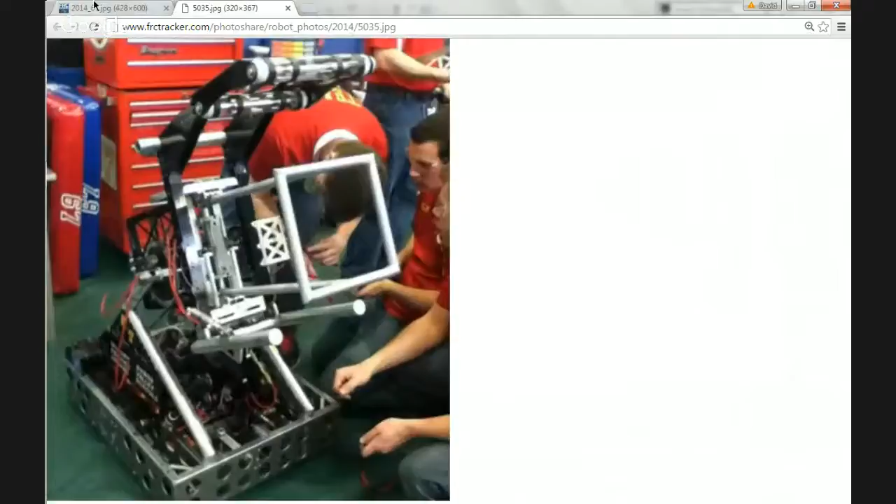These are the two photos that we're going to be using to redesign or design from scratch the FRC-67 robot from 2014, Hotbot. Hot always has really, really nice designs. We're going to, in one sitting, do our best to get as much of the design out of the way as possible, figuring out all the constraints and the general sizes of things, and then getting started on a 3D model.

So this robot functions by having this one large arm. It picks the ball up by tilting down in this direction, scoops it up with the intake rollers against this bottom bar here, and then the entire arm will rotate around, and there's a very mean looking puncher back here, powered by constant force springs, the same springs that are inside your tape measure. That releases all of a sudden, punching the ball and firing it out.

Very, very powerful. Was a very successful robot. It was great looking too. Another cool feature is to center the ball. It had these, see the flames here, that's actually a four-bar linkage that'll come over here and slap the ball on either side to center the ball on the puncher.

You can see here, this is the puncher when it's deployed. Springs are released. It's this large square here that'll hit the ball on all these sides, and it'll fire it. Fantastic looking robot. Worked very well. Great on the field. So let's go ahead and get started designing it.

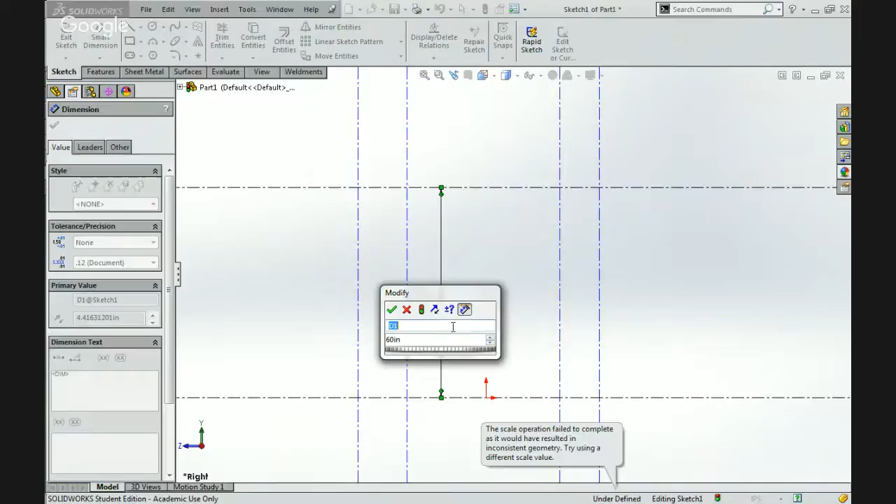Changing this value would result in invalid geometry. Previous state has been restored. I'm going to give this a shot going right to the origin. I have no idea why this is happening. Goodness gracious. Try 60 one more time. Not going too well. So here's the next plan. Let's get rid of that horizontal relation so that way that line can pivot. Maybe that's what's causing the issue.

60 inches. Dang. It's obnoxious. Maybe there's something up with that line that I drew. SolidWorks is having some sort of issue. So draw a fresh line. Call that 60 inches. Valid. All right, we're going to start over. Oh goodness, SolidWorks, sometimes you drive me nuts.

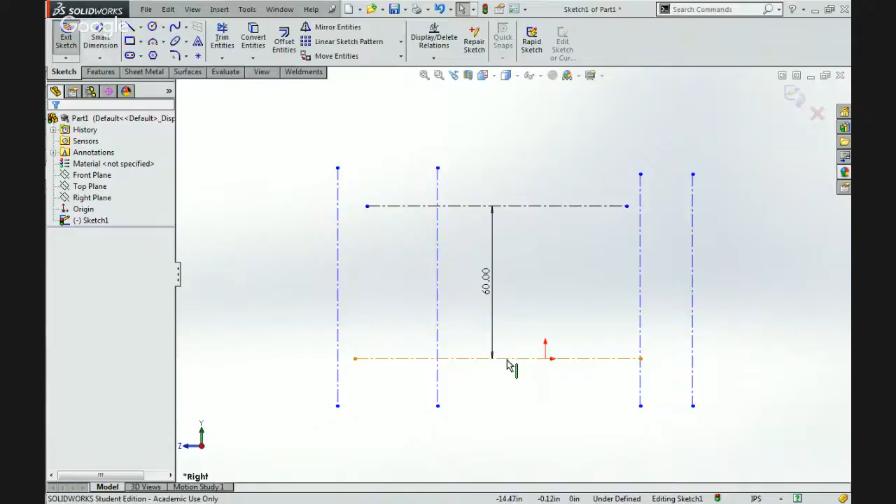So pretend this is our upper limit. Double clicking, by the way, lets you exit the line that you're drawing while still keeping in the line tool. Before you draw the next one, you just double click and it'll not add the one that you're about to draw. Great, now let's try. Come on. Inches. There we go, that worked. So that's 60 inches now. Just because I like infinite lines, I'm going to make all these infinite length. Hopefully it won't give us any grief about that.

Now this is going to be representing the width of the robot, but the protrusion is at a set number, and I don't remember what that number is, so let's go figure that out. You're going to find that number in the game manual. So for instance, this is going to be Game Manual FRC 2014. And look at that, FIRST has great documentation.

Let's see here. Is this really 2014? Sure is. But you have to go to the archive. That was the old website they had set up. So here we go. This is it. Admin manual, one-page game description, game animation. I must have clicked incorrectly. Trying one more time. Those were the admin manuals.

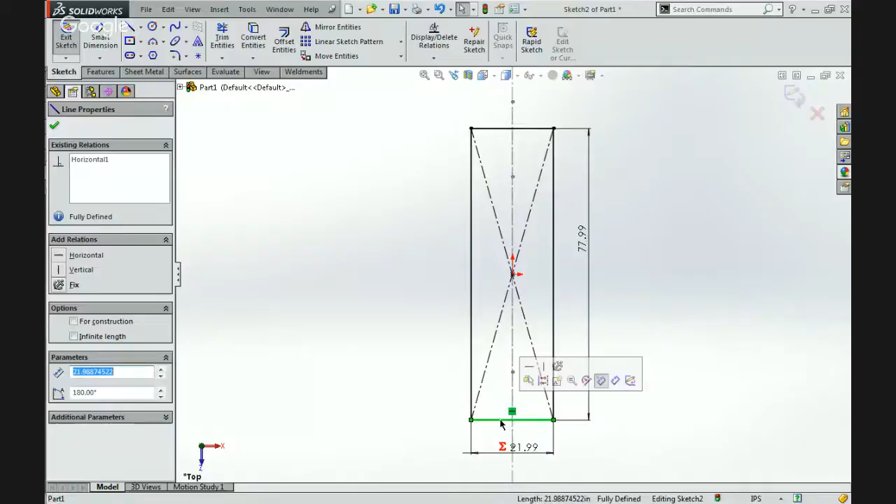Well, that's odd. Because if we take, let's say this is 30 and 26, the sum of the parts going all the way around is 112. Oh, it's very odd. I don't know what had happened there. Must have been some crazy thing I've done. Scratch that last.

Well, we set that equation up correctly. So the equation truly is the other dimension minus 112 divided by 2, or whatever your frame perimeter is going to be divided by 2. That will solve this equation here. So if our robot was 30 inches, it would have to be 26 inches. But in FRC, we need to make sure that we play correctly by the rules. Technically, as long as your design is initially spec'd at 112, they can't nail you down on the rules, but it's always good not to run up against that line.

So if you just subtract 1, if you just do a design frame perimeter of 111, that would be ideal. So just do a frame perimeter of 111, divide by 2. Just to make your life easier once you get to competition and you're being inspected, just to make sure that you don't accidentally go over your frame perimeter. So in this case, it would be 30 by 25.5. Perfectly awesome. So we now have 2 dimensions of our robot laid out.

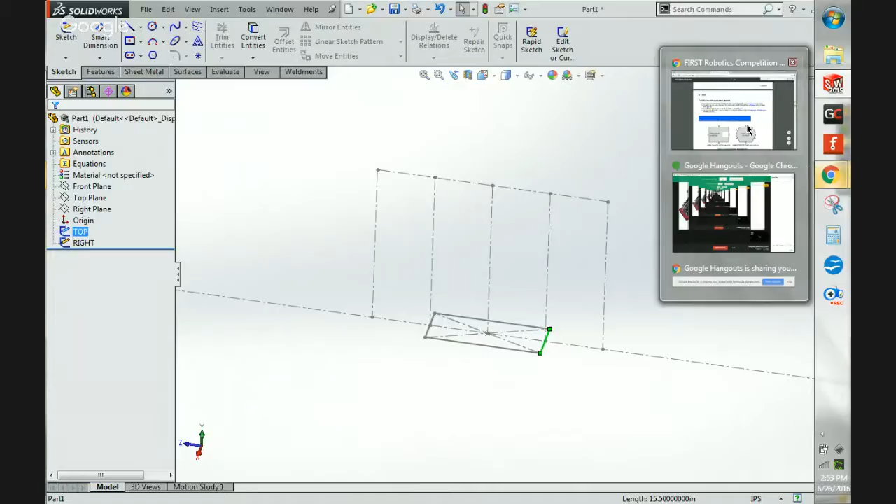So if we go back to our top view and we say, just joking, this is going to be 40, you'll see that this sketch updates. It's still coincident with that pierce. So the only data that we really have any idea about is just the aspect ratio of this robot. So who knows how big this robot actually is.

If we look at it with the 24-inch ball, it might be 24 inches in diameter or a little bit bigger than 24 inches in diameter. That's the size of the ball. So what if it was 26 inches wide? So let's jump in. Let's make this 26 inches wide. Actually, it wants to be the other direction.

So we can see here that it's supposed to be 29.5 inches long. So I'm just going to do 29.5. Gets it in the right orientation. That way, this is the width. We're looking at the side profile of the robot, which is going to be longer. Great. So does that look about right for aspect ratio? I think it might be a little bit boxy. So if we can make this a little bit longer, maybe it's supposed to be, I don't know, 30.5.

Maybe 31.5. Maybe it's exactly 24 inches. We can see here that's about the right aspect ratio. So that's about the ratio that they had. It was probably 24 inches frame perimeter wise.

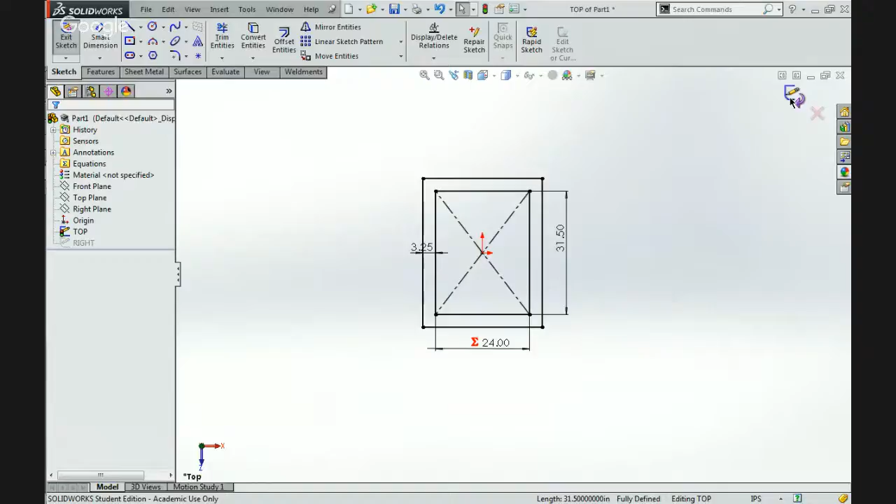There is another variable that we kind of forgot about, which is the bumper. So if we go into our top-down sketch, this is the frame perimeter. That's what this represents. But there's also the bumper perimeter. If we take our offset entities tool, bumpers are 2.5 inches, but the back plate for the bumper, the 3/4 inch plywood, that's 3/4 of an inch. So we can add those two numbers together. What do you know? That is our bumper perimeter. Very good. So that gives us a sense, again, of where it is.

Just a note, though, this dimension here is exactly to the frame perimeter. When we looked up that rule, it had to be 20 inches from the frame perimeter. It doesn't matter where your bumpers are. In this case, the bumpers are going all the way around. If we wanted to, we could have the bumpers split, but as you can see here, bumpers go all the way around. In fact, they made their bumper one piece, and it went on just like a sock.

But when I saw them at competition, I was kind of fearing for the robot. They were whacking this bumper down with hammers, and they had to whack on the red bumpers and whack off the blue bumpers and everything. It was quite horrific to see that sight on such a nice, elegant robot. Their bumper system didn't work too well. So I would recommend splitting up your bumpers into 4 pieces.

For instance, if you look at your robot here, you might extend this entity over here and that entity over there. Break up your bumpers into multiple segments. So that way you have one bumper here that's longer, a narrower bumper, a long bumper, and a narrower bumper. You could split it up in the other direction too. That's up to you, whatever fits the design more. Great.

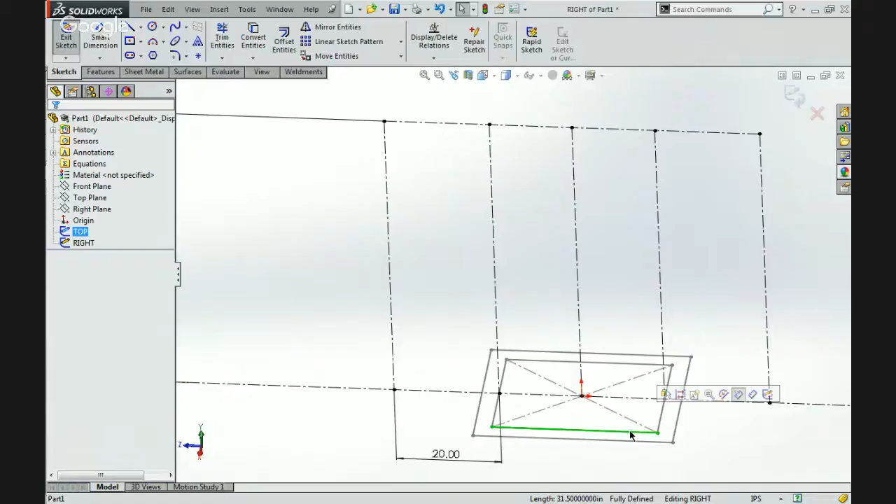You might not know that it's going to be 31.5 inches in the end, so you might start with 30 inches and then realize, oh, I can't package everything that I want to, so you'd make it a little bit longer, and hopefully your robot won't explode. So it's a lot of a give and take, but for the simplicity of this example, we're just going to say that this is about right. We might have to go back and change that number later on.

So here's our bounding box. We have our robot that at the beginning of the match has to fit inside this area here. But what does it have to play with? Well, it has to play with spheres that are 24 inches in diameter. That's a little bit big considering how big a robot can be. Yeah, that's a little bit scary.

It's going to be a challenge to get our robot to handle these large spheres, but we know that it can be done. We can see here this is a successful example. And what they did was they had this arm. So let's get started on designing the arm. But before we can design the arm, we need to know, well, what does the drivetrain look like? So we're going to design our drivetrain.

Here we go. This is the side view of our drivetrain. We can see here that the design they chose to go with was a sheet metal drivetrain. Those are very nice, robust, light. However, on Rat-Pak, we've had trouble with them. We just spend so much time on the drivetrain, we end up losing our train of thought for later on getting the top hat done correctly.

So I would recommend on Rat-Pak, until we master the drivetrain and really figure out exactly what we want to be able to do, use the VEX West Coast drive. And West Coast products are fantastic. They are all part of a system and they all fit together masterfully well.

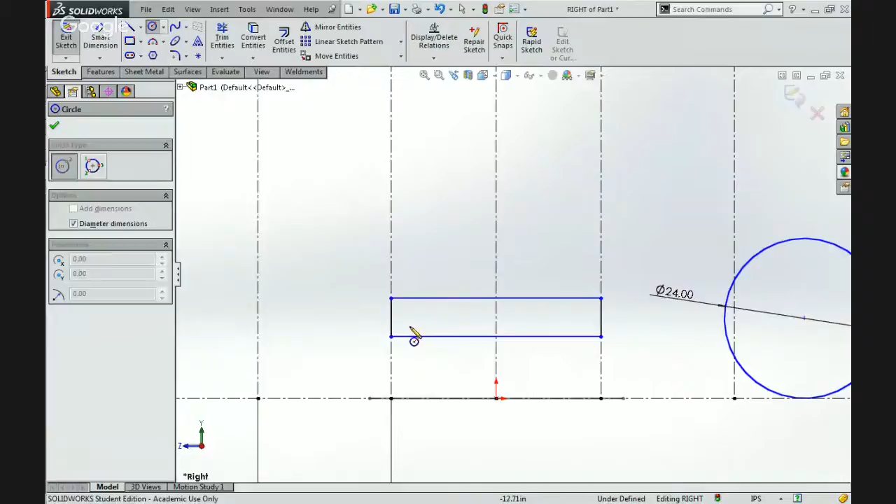It's very important when you're dealing with these tank drives that you set an offset between these wheels. I want to make sure that there's at least a 1/4 inch difference, that the center ones are lower or the outside ones are higher.

We also need to make sure that there is space between the wheel edge and the edge of the frame. So let's go ahead and just set that arbitrarily at 1 inch. We'll change that later, I'm sure. To reference the side of the wheel here, I just added a point. And when you add a point, you can see here that it gets these diamonds in the corners. When you hover on top of them, you can place points at those places, and then you can reference those points. So that's all happy, fun, and games.

Then we need to mirror this over to the other side, and we'll see how to do that here with just the mirror tool. Entities to mirror. We're just going to keep mirroring this over to the other side here. Look at that. Very nice. There's one more thing that I want to do is figure out the spacing of this wheel. You can see here that we don't really know where it is left and right. Don't worry about up and down just yet. We'll get to up and down.

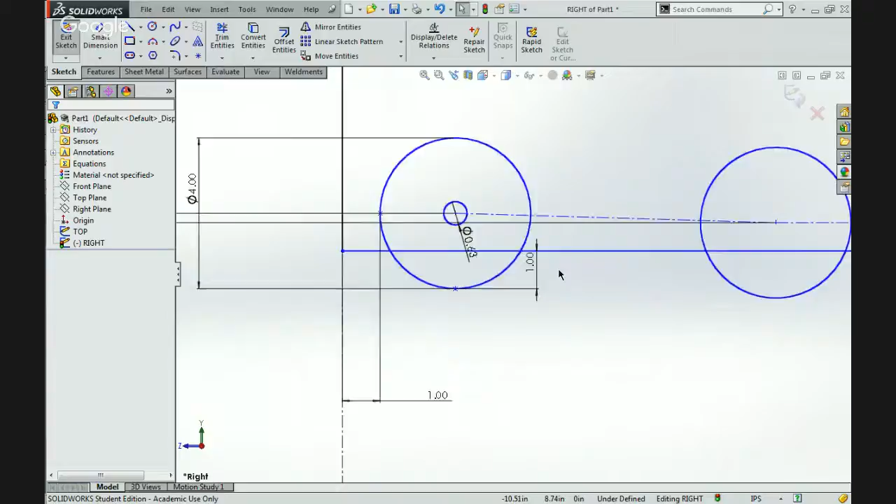But we're likely just going to use actually 5/8 shaft, 0.625 shaft. So as long as there's this much room here on the plate, you'll be just fine. And the more critical thing is this one over here. That one's closer to the bottom. So we got to make sure that that 5/8 circle isn't running off the edge. And clearly it's not. We're completely fine.

But if you had thought that this would be great as 1 5/8, look at how close this one gets, right? Your bearing or your wheel shaft is going to be really close to the edge. You got to make sure that, especially when it gets a little bit lower, that your shaft isn't overhanging on the edge there. So that's just something to consider. Make sure that you don't make that mistake. But hey, look at that. Now our robot has wheels. And just to make it pretty, let's just mirror this over to the other side.

Having detail in these drawings is very important. It can remind you of things in the three-dimensional world. But clearly our wheels are going to be on the ground. So go ahead and make those tangent. And they should be fully defined right about now. If you haven't fully defined them, figure out how they move and then constrain those. Great. But how tall is our drivetrain?

Well, that would be very nice if we could just make this super duper skinny like that. You very well could. You just have to make sure that you can mount the bumpers. So let's worry about the bumpers right now. The bumpers are a very important part. Before we even start looking at the arm movement, we need to make sure that we understand where the bumpers are, because the bumpers are going to be the thing that are actually interfacing with the ball first, very likely. We're going to need to make sure that we design around the bumpers.

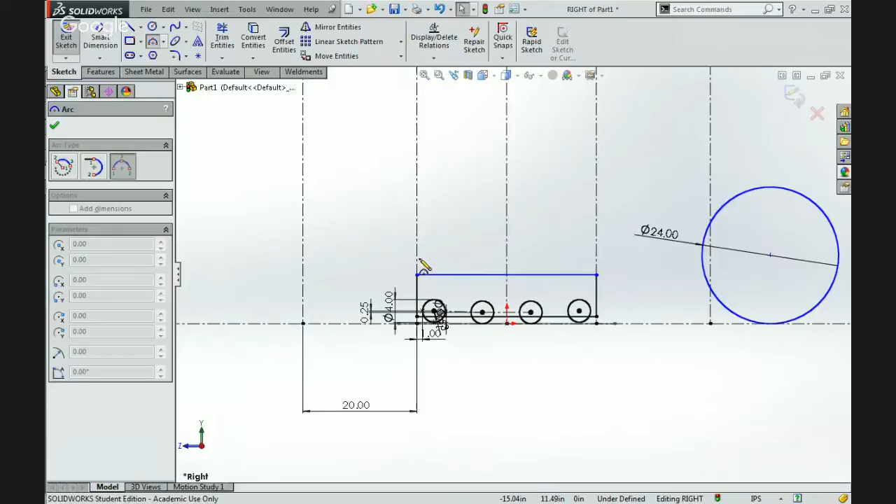So to do that, I'm just going to add an arc. Actually, just joking. I'm going to add a line. This is representing the thickness of the plywood, and that is 3/4 of an inch thick. And then I'm going to add an arc and another line, and an arc and another line. Look at that. That's a bumper from the side profile view. That's all we really need to make this work. So we'll make each one of these segments tangent to the next because it's going to be a very smooth wrapping action.

When the... one second, let me finish that up. Good. There is a plane here. That 3/4 inch is completely and totally wrong. Just joking. It's going to look more like this. There is a 3/4 inch plane. That represents the plywood. That's where the plywood is. So go ahead and make that 3/4 inch.

The pool noodles are complete circles, and so they're going to be tangent with the back plane. So you can imagine here, I added that tangent relation. They can no longer move out as soon as I make these equal to each other. And I set their diameter as being 2.5 because that's the diameter of a pool noodle. There we go. Now they can no longer move out.

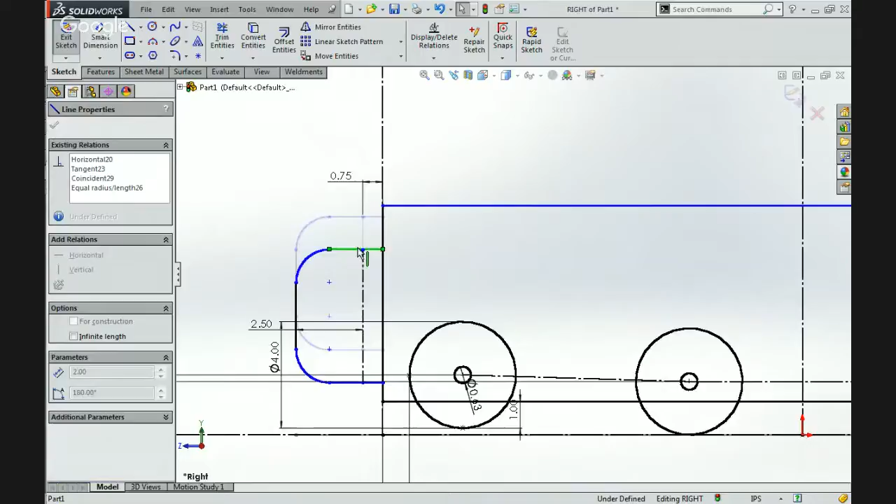There is a rule that defines that. We need to make sure that we research that very well. So if we come over here and we search bumper, there are lots and lots. Bumper zone, that's what we're really looking at. So let's look at the bumper zone. There are only 6 mentions of bumper zones. Great. So bumpers must be located entirely within the bumper zone, which is between 2 and 10 inches from the floor. The reference to the robot floor, yeah, so just if the robot's on the floor, it has to be between 2 and 10 inches.

So this is also what the bumper looks like from the side profile view. You've got each one of the pool noodles. They're tangent to each other, tangent to the backboard. And then you've got your cloth hanging over. That cloth is kind of negligible. Doesn't really affect too much.

But if you have hard parts that might protrude, you know, like this 1/8 inch plate here, you might want to add that in because that adds a total of 1/4 inch to your entire robot width, which can be significant. So make sure you add that in too, if that's the design that you're going to use. But 2 and 10 inches off the floor, that's the important number that we get from here. So let's jump over to SolidWorks.

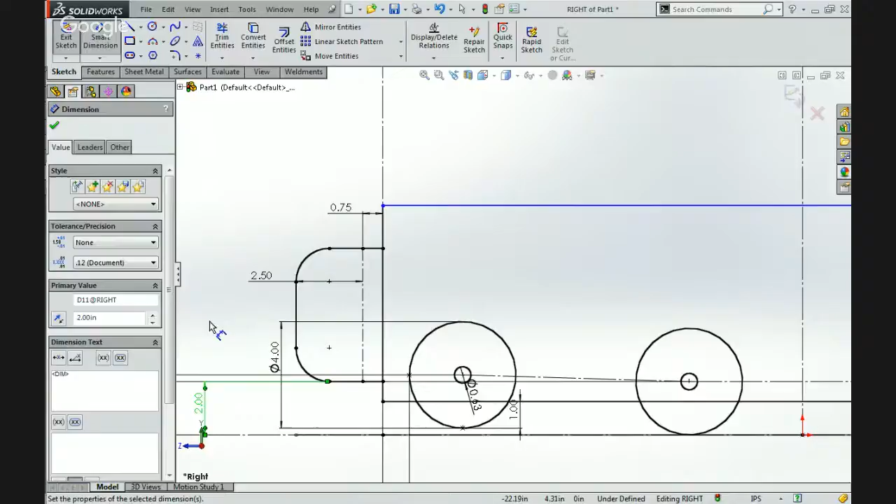So that means that the upper bound, we could place our robot bumpers 10 inches from the floor. They could be this tall, or they could be as low as here to there, 2 inches off the floor from the bottom. So for right now, let's just leave that at 2 inches. Hot likes to put everything as low as possible and keep their CG low, especially when they have such a tall robot. And when we look at their robot here, see their bumpers are essentially flush to the top of their drivetrain. Protrude a little bit, but in our case, let's just make them flush.

So now that our robot bumper height is defined, let's just take our height of our frame and make it match whatever the bumper is. Fantastic. The next thing that you probably get into for designing the drivetrain is figuring out the gearbox, and if the gearbox doesn't fit inside this height, currently this height is 5 3/4 inches. It should fit, but in the case that you can't package it, you're going to need to make that frame taller. But those are all things that you can give and take. So there's an abstract drivetrain. It's looking pretty good. Very nice, very nice.

Now we've got this ball. There's the ball. Pretend our robot is driving up to it. It touches the ball right there with the bumper, and that's all happy. But how does this robot actually function? It's going to need to take the ball from the ground and store it up here, and then have something that fires it, pushes it out. So let's go ahead and get started on drawing whatever that is going to be, and that's going to be an arm.

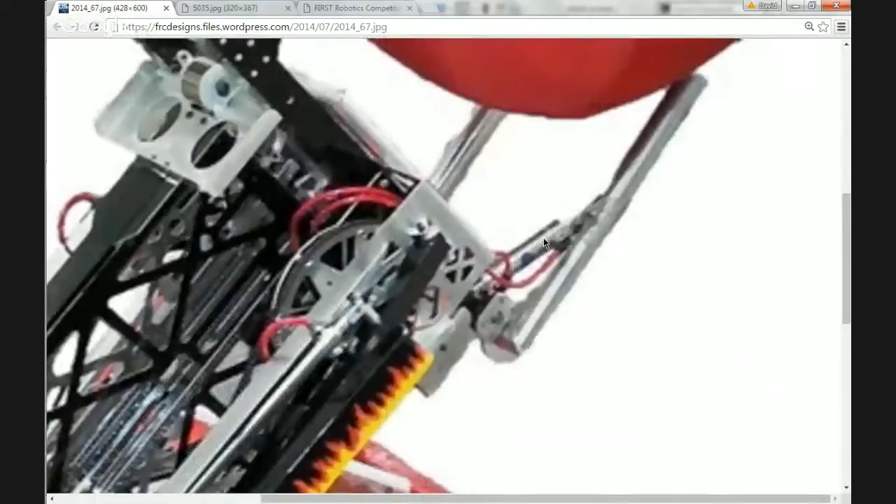They integrated all of that functionality into one system. That's putting all of their eggs in one basket. They have quite a cool bit of detail here. We can see that these two bottom pegs each have their own pneumatic cylinder. Who knows what that's used for? We'll probably figure that out later on. I'm guessing that this is used for tilting these prongs down, so that way they can scoop the ball up more, but we'll take a look at the geometry and figure out if that's needed.

And then they have pneumatic actuated 4-bar linkages that center it. And they've got this intake. So we can see how that all plays in together. And then they've got a pivot point that's back here, and a puncher, of course. So let's get the structure going for wherever our pivot point's going to be. Pretend that this point right there is our pivot point. We need to support that pivot point. It's going to need some structure, it's going to need an axle, really, something to pivot on.

You can see here that, let's see, is this better? Yeah, this is much better. We can see here that there is this structural brace that comes back here, and the actual pivot point is up here. This is a sprocket that controls the angle of the entire machine. So back to our SolidWorks CAD model. Instead of having a point here, let's make the pivot point a sprocket. To get the best gear down ratio, this is going to want to be a pretty big sprocket. So let's say we found an 8-inch sprocket. So there's our sprocket. This is signifying our pivot point.

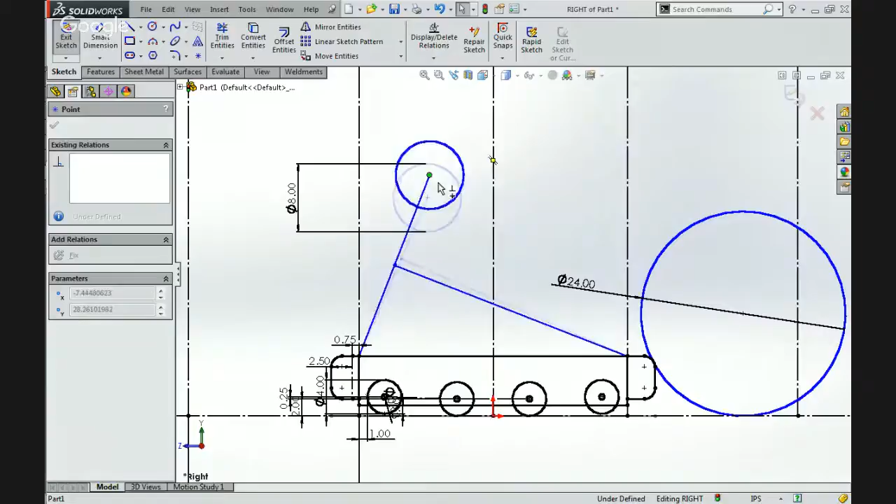So there's that. We don't know where this pivot point is going to be located. We could lock it arbitrarily into space for now, but let's keep building off of this undefined geometry. We're going to need a puncher. That's going to be a really critical point. And we're also going to need an intake roller and this scoop down here. So let's take a look at the scoop.

If we were to scoop the ball directly, as if we slipped a spatula underneath it, we would need to grab the ball with an intake roller that's up here somewhere. The intake roller is going to be tangent to our ball here. And then that scoop would have to go on the ground. Let's pretend this line here is the scoop. It would need to ride on the ground in order to get underneath the ball, or give the roller something to pinch the ball against.

What Hot did was kind of interesting. Instead of holding the bottom of the ball, they're holding the edges of the ball. They have two of these pinch bars. They're not holding the ball from underneath. The ball is actually drooping underneath these two bars.

So we're going to mimic that, but we need to know where on this circle our ball needs to be pinched. This is always difficult to explain, but the ball is going to be drooping underneath these two pinch bars, which means that when you're looking at it from the side, you're not going to be picking it up straight from the bottom. You're going to be picking it up somewhere closer to the center. But how close to the center is that? To answer that question, let's make another ball over here. This isn't going to be part of the robot, just a model over here in space.

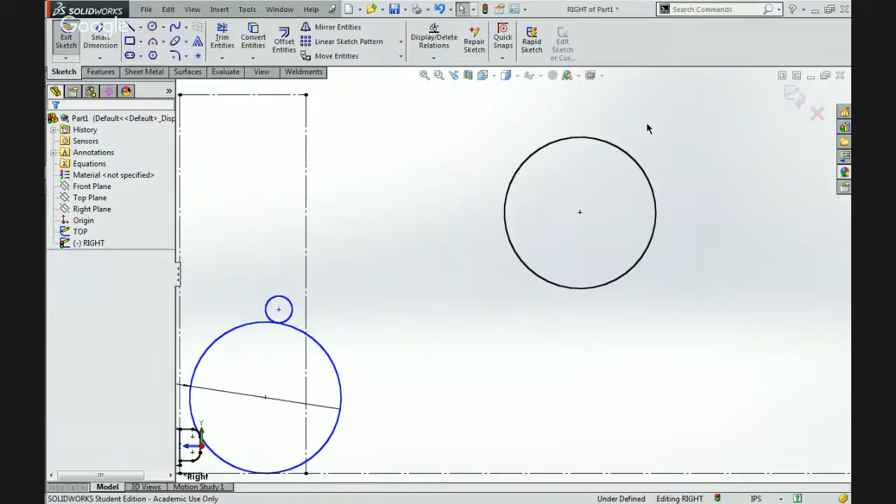Pretend that this ball, we're looking at it from the top. This ball's from the side, this ball's from the top. We have a couple of bars that are coming across it. These are the bars that are holding the ball. This is what the ball is essentially rolling on. Those two bars are equal to each other. That way, when you move them across, they are equally centered. The lengths are equal, which means that they're spaced equally on the center.

Now this is kind of cool. The length of this line, we don't want this to be driven here, you'll see in a second. I'm going to make this a driven dimension. And let's say that the two prongs holding the 24-inch diameter ball are 18 inches apart. So this is where the prongs were located. That means the interference between the prong and the ball is going to be 15.87 inches.

We could imagine that as being the prong length, but this is also the cross-sectional diameter of the ball. If you thought about this as the ball from the top-down view, and you took a knife and sliced the ball perfectly right there, and you looked at this line from the side view, that would be a circle, right? This line is the diameter of that circle. So you could essentially draw a side view of this same exact ball that had a point vertical from that point, as long as their center points were on top of each other.

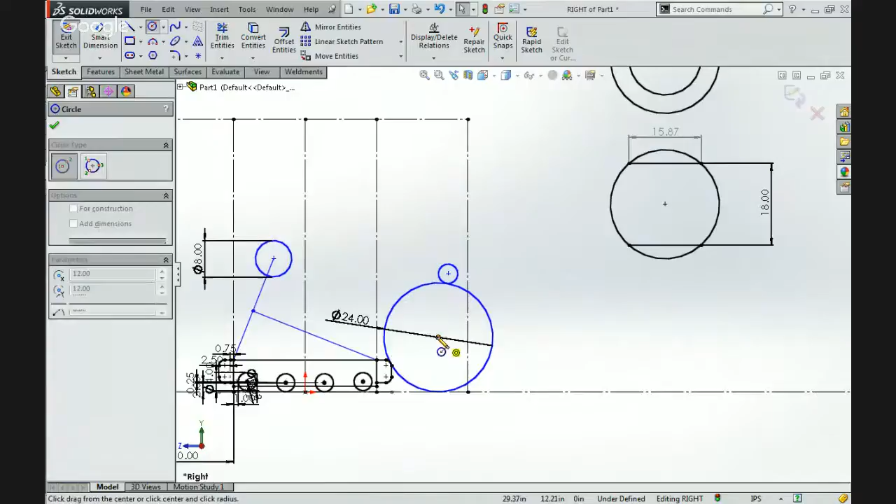Now say that our prongs were 9 inches apart, you can see that intersection changes rather significantly. But if it's back at 18, we can see that's what we're going to be interacting with. So let's say that these prongs are indeed 18 inches apart. Who knows if that's exactly what they used, but we can change that number later on. Whatever that number ends up being, that's going to be very important. So let's make these two circles equal.

Now, the cool thing about what we've just done here is we're making our model parametric, which means that every single dimension that we are specifying is coming from one place of logic. This diameter of this circle comes from the space between these two lines, the space between the prongs. So if we wanted to change those prongs, it's going to change the model. And as we add more relations, the entire model is going to change to fulfill whatever this number is. That gets to be like automating our model, and it gets to be super awesome and cool.

Very good. So let's pretend we were going to make our ball hit our bumper. When the ball hits our bumper, and it's tangent right there, our roller is going to be in contact with the ball. Remember, the roller can never cross this line. This is the outer. This is as far as all of our hardware can go. The ball can cross the line, but the hardware cannot cross this line.

We need to specify some compression bars. I'm going to call these compression bars. These bars here that we've just defined, these guys, those are going to be called compression bars because they're compressing the ball against the roller. So we're going to draw a couple compression bars. There's one, and this is what the ball is going to roll onto.

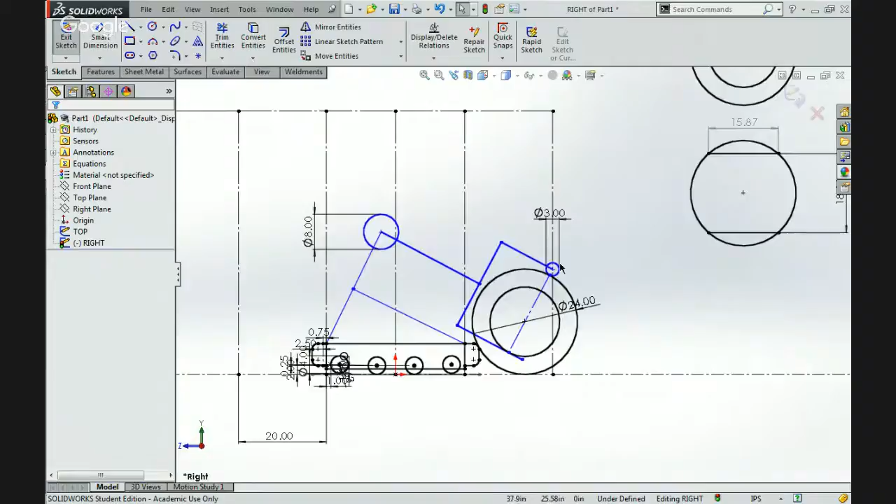I think the reason for that is it shouldn't be defined all the way, except I added this accidental relation of defining the center point of the roller to the edge of our hardware limit. But there's also another really important thing, which is that hardware limit. Our hardware cannot pass this point.

So even if you made this, let's make this tangent, and instead of making this 20 inches, let's give ourselves some room, 19.5 inches. So now when we make things tangent to this, we're actually safe. We've got a 1/2 inch of clearance. But now take a look at what happens to our robot design.

This is defined in space. These are with all the constraints that we've very carefully added. This is the only successful solution. This is the only place that it can be, because the ball is defined to the bumper and the floor.

This imaginary line's at the center point, and the roller here is at this diameter. The compression bar is at the location here, at just the right spot. So if you imagine, again, changing this, you can see how our model is going to change.

In this particular instance, you can see here the compression bar is inside our bumper. That's going to be bad. The only way that we can get around that is to be putting a cutout in our frame and making sure that our bumper doesn't interfere with our robot.

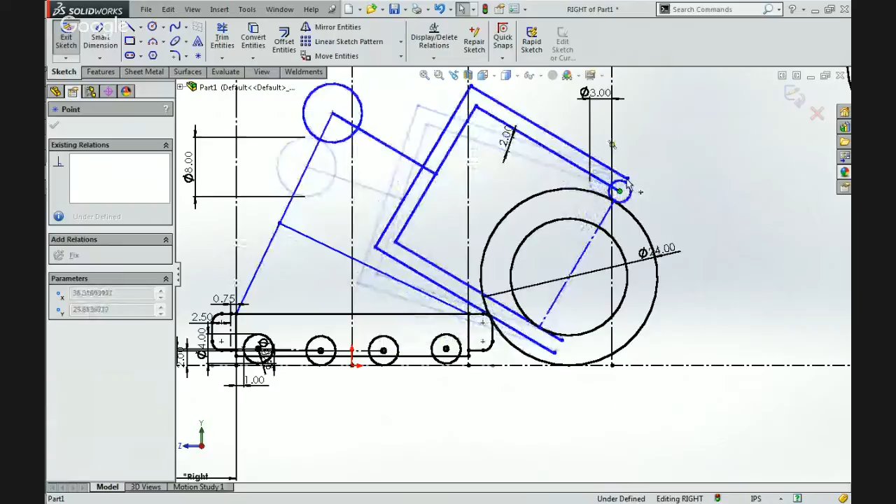For instance, what if this wheel was not tangent to the edge of our frame? What if it was inboard more? You can see that only worsens the problem. As we move it out, it solves the problem. You know, our arm could be like this. It could be all great. But as we bring it back, it makes the problem worse. So in this particular instance, this is a variable we could change, and putting it as far out as possible, making this tangent, is contributing greatest to resolving this issue.

What other variables could be changed to make this issue go away? We have this variable over here. We could change the spacing. For instance, what if this was not 18 inches, but 20 inches? You see here that means that we'd be grabbing the edge of the ball more. And look at that, we could actually almost cut it.

There's a cool thing of how we're doing this. We could make this defining smart dimension over here driven. And when we make that driven, you see that everything turns blue. And we can actually go backwards. We can have the model define these numbers. Say that we wanted to make this tangent to our bumper. We can do that. And there it is. And we actually have some more freedom of what number this is.

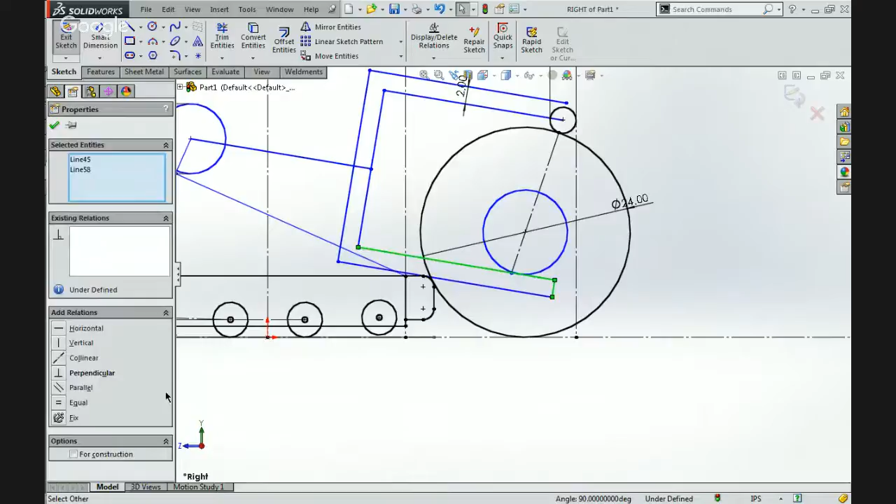Oh, this is pretty close. Just for my sake, I don't know what drives me to do these things, I was just using trim and extend entities to kind of pseudo delete a couple of the automatic relations that it had added for us. Oops, don't want collinear. I want perpendicular. Okay, now this just has to be coincident with that. There we go. That's what I was trying to get us to do. I was wondering why this wasn't working.

All right, so going back to what I was saying before, we can go two ways. We can either define this is going to be exactly 10.8 inches, and it'll update our model. But we can also have our model be the defining factor. So we can say that we want this bar to be tangent with our bumper. And you can see that it defines everything now. If this condition is true, this tangent, you get this really odd number of 20.29, 12.82. It looks really elegant here in the geometry, but the actual raw numeric values are a little bit odd.

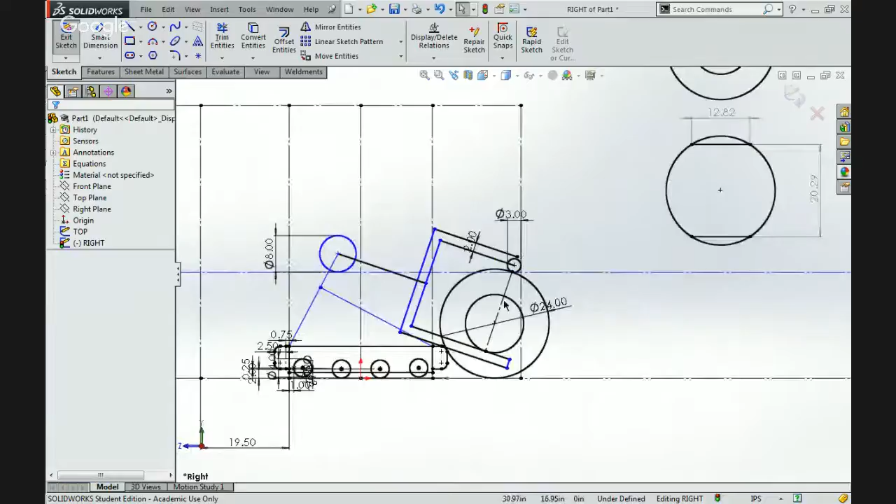Now, there's a second thing to consider when we're looking at things like this intake. I'm just going to make an infinite line that is horizontal. Now, take a look at this. This line that I just drew represents where this intake roller is going to be as this ball is being rolled into the arm. It means that this intake roller is going to have to compress the ball; everything above this line is going to need to be compressed. It's going to need to squeeze it that much.

And we can see here that at the apex of the ball to that line, it's squeezing the ball 3/4 of an inch, about 0.7 inches. And that's okay. I think the roller could compress it 3/4 of an inch. But there's another thing that we really need to consider, and that is currently we're just barely touching the ball up here, and we're just barely touching the ball there. We need to compress the ball in order to have a really good handle on it.

So what I'm going to do is delete this tangent relation that was on the ball before to this intake roller, and the ball is going to stay in the same place, but our arm is actually going to interfere with the ball more. We're going to compress it a lot more. And how I'm going to define this compression is just by taking a line that goes here. This line is going to represent the apex of the amount of compression.

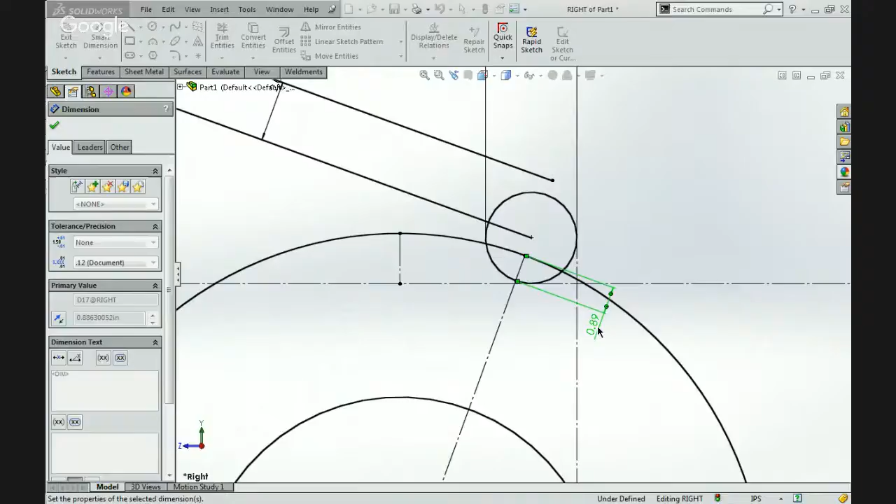When you think about the geometry, this is going to be the tip of the ball when the ball is compressed this way. So you can see how that might line up, and we're just going to leave it that way. Now, what's the amount of compression that we want when we're holding onto our ball? Well, that's a good question. These balls are very big. They're 24 inches in diameter. We're going to be holding onto it at 3 points, and the compression is going to be equalized on everything. Let's give it a shot at 1.5 inches. That's going to be a really good compression.

We don't really have to worry about the ball touching here because the ball is actually being compressed. It's not actually interfering, the ball is just giving. Now I think I understand why in the original design they had the pneumatic cylinders on these arms. I believe those cylinders were to apply and relieve the compression of their entire system. So when the cylinders were contracted, it would be compressing the ball 1.5 inches or whatever it was. And when you extend the cylinders, it relieves that compression and applies 0 compression.

It's not completely loose and rolling around, it's just not being compressed at all, which means when you fire the puncher, it doesn't have to fight to get the ball out of the compression here. All it has to do is just roll it on out. It's just pushing the ball out; it doesn't have to fight the compression to get the ball to exit. So they probably have this on a pivoting point here.

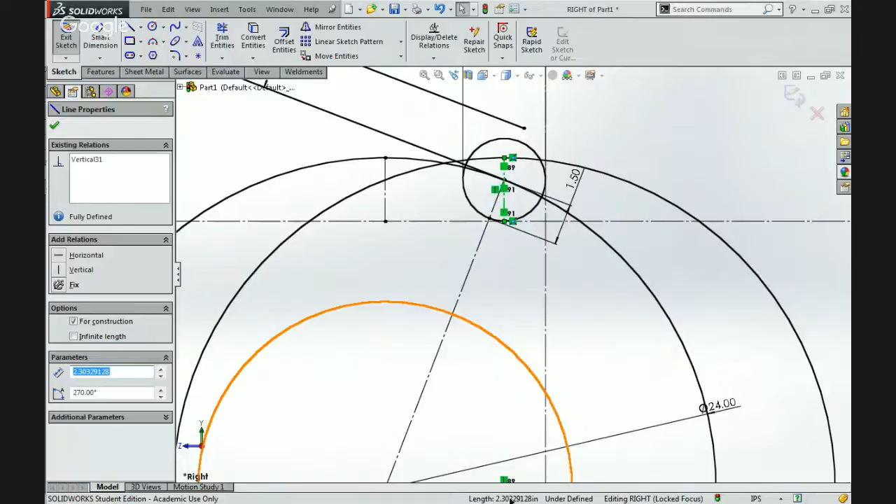This ball is tangent to the ground, and it is the same diameter as this ball. Take a look as the ball is rolling in. Right at this point, when the center point of the ball and the center point of the roller are underneath each other, you are compressing this ball from the apex of the ball to this bottom, to this imaginary line that I drew. And you can see here, I'm just representing this with the existing ball. It means that we are compressing this ball 2.3 inches in order to get the ball inside of our arm.

As you move the ball further along, that compression eases and it releases to the point of being 1.5 inches right there. But you can see here as it comes through, there's no compression. You're starting compression here, and it gets really high, lots of compression, and then it comes back and settles at the 1.5. So that's kind of an issue. We might not be able to compress the ball 2.3 inches. That might be too much to ask for. That might be too much stress on the ball, too much stress on our robot. So I think what they did to relieve that issue was they added a second roller.

Now, there is something that's bothering me here with the way I've constructed this: the center point of this roller is on the edge of this. So what I'm going to do is draw a roller that is in the middle of this beam here. I don't want it to be mounted on the edge because that's technically impossible. I want this to be mounted to the center. So we could try to release the dimensions and relations of this roller and move it, or I'm just going to redraw it in this case. I'm going to re-add all the dimensions because some of the dimensions that we added in getting here are very difficult to unadd. But we're going to see here that this is going to affect the geometry as well.

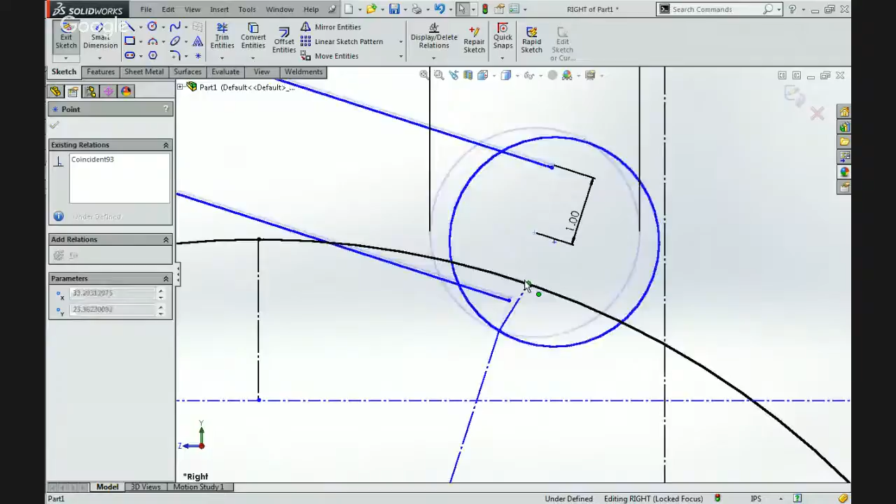And now we need our 1.5 inches of compression, which means that I'm going to re-add this line too, because that line's not actually constrained to this edge of this line here. It's constrained to the edge of the ball. That's what's really important. And it's also coincident with the center point of the roller. There we go. That is what we were looking for. Make sure that this is collinear with that, or that is coincident with the center point of that ball. It's the same thing. And now we can see here, this is much better. The center point of our roller is mounted in the middle of our beam.

Now I'm going to re-add that 1.5 relation. There we go. Very good. So you can kind of imagine our ball deflating or being compressed to fit that. Okay. Very good. So that's where that's at. We need to make sure that that is coincident here to that edge.

And you can see here that's probably what Hot did. Their intake roller protrudes out of their... when you touch the first part of their arm, you touch the intake roller first. It is on the outer edge of their entire arm.

So now let's add a second roller. This is going to relieve this issue of this insane compression, I believe, or at least give us some more control over the ball. Now that I'm thinking about it, it might not relieve it, but we're just going to add this to move along. So the important thing is when the ball is held in the arm, this is the position of the ball when it's held in the arm, this roller is going to be tangent to the ball. So you can see here we're really designing the arm around the ball in the position that we're trying to pick it up in. That's what's really important.

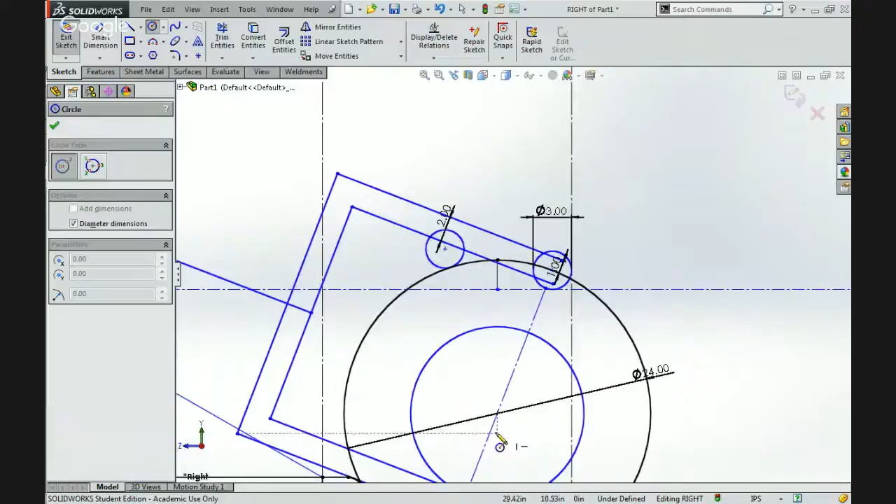So now that we have this, well, currently this is having no compression. We want to make sure that this has equal compression with this one here. So there's a second way of denoting compression. Instead of having a line, since we're going to be referencing multiple things, I'm going to create a second circle. This circle is representing the compressed radius, or the compressed diameter. So this is going to be tangent to that, just like that. However, let's bring that back down. Before I get too carried away, I need to get rid of that other tangent. Perfect. That's what I was trying to do.

And now that 1.5 inch compression between the compressed circle radius and the actual diameter, that's the difference between the two. The compression and the actual is 1.5 inches. So that gives us a really good sense there. This is rough. This secondary roller is going to be located somewhere along this path that it's allowed on. Great. Where do we want to place it?

Well, I'm thinking that this 1.5 inch compression is a little much. Let's go back to the 1. That'll help relieve this overarching issue of this compression. This is what we're really trying to relieve, this total compression. That's the true issue that we're trying to solve. So to make this nice and symmetrical, I made this secondary roller tangent to this horizontal line, which was tangent to this one. And the reason for that is when the ball is, hold on a second, no, that's not exactly right.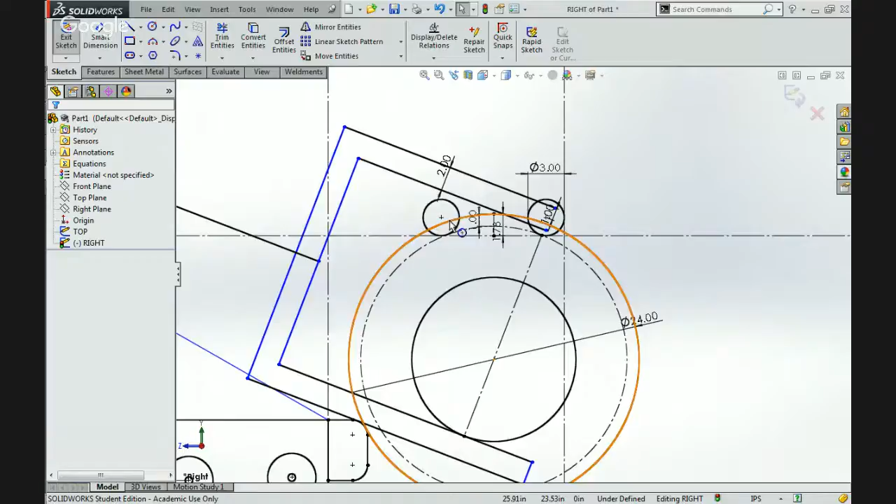So, by adding two rollers, we can do one of two things. We can pretend like this is a secondary roller. This is kind of like the position it is in now. All it's doing is providing a place for the ball to back up into, like it's hitting a backboard type thing. Or you could have these two rollers act as if they are the same roller, like these are both primary rollers, in which case the ball isn't really being primarily compressed on this roller, it's being compressed between these two. And I think that's what we should do.

So, in a sense, remember this line that we were drawing before? That was making sure that this line was going to pass through the center of the ball so they have a really good grip. The critical part was that it was lined up with the center of the compression, the middle of whatever's compressing against this compression bar. And if these two rollers are truly going to share that compression, this line shouldn't be coincident with just one roller. It should be coincident with the average of both rollers, or essentially the midpoint of the line between the two rollers. That's what I've just added here. And you can see how that changed the geometry here.

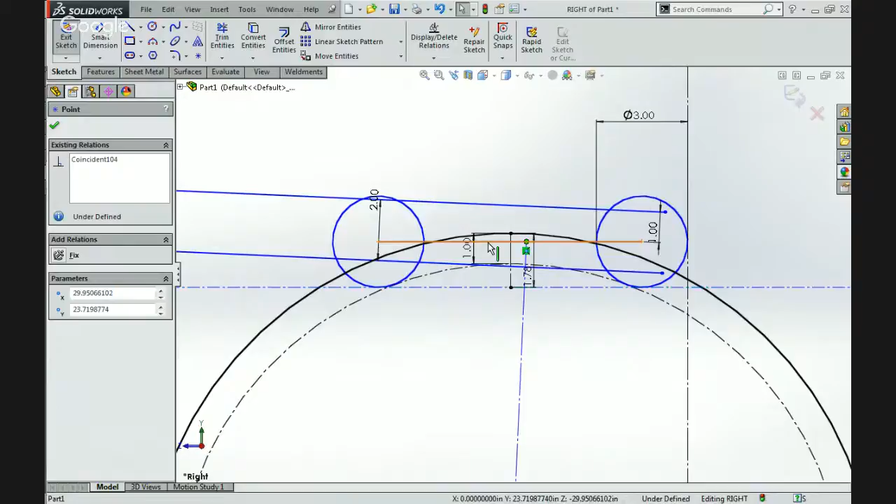Let me just think about this. We added this as being a horizontal line, didn't we? If I get rid of that horizontal, it still is fully defined. This shouldn't be fully defined. There's something around here that's making this do something that I wasn't expecting it to. Let me think about this for just a second. I just undid that midpoint relation. That was horizontal before, and this was horizontal before. There we go. That was it, I think. Yep. And these still want to be tangent to each other. Dang it.

That wasn't exactly what I was expecting. This guy is horizontal back? Nope. None of these are horizontal. That is not horizontal. So what I think should happen is I should be able to rotate this along. Oh, that's what. This is locked already in place. Yep. So it was doing what I was expecting. It was just that it was smarter than I was.

So this imaginary line needs to be coincident or midpoint with that. Right. This is what I was expecting to happen. We should still be able to choose where we have our, you can see all of our relations kind of at work here. Yeah, we can still choose where we want to put our rollers. This is kind of where I was after here.

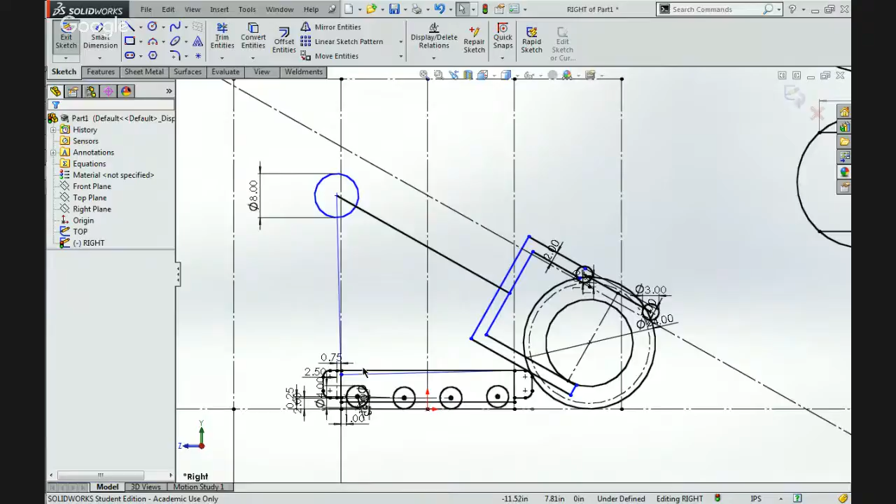And again, this is the really raw, straight design talk. I don't have very much of a clue of what I'm doing here. I'm designing this for the first time. Okay. I'm going to get rid of that line, because I'm going to re-add that in just a second. Okay. There we go. So we can kind of see how some of these relations are happening. If you're following closely, you know exactly what I've got.

The important thing again that I really want to figure out and resolve is making sure that we're not compressing the ball too much when we're intaking it. So for instance, currently, we're compressing the ball an obscene amount in this scenario. If we designed it like this and we built it, we're compressing the ball 6 inches as we're trying to get it rolled into our robot. It's also illegal because our hardware is extending beyond the frame perimeter.

So let's start to resolve these issues by moving this back into the perimeter. But we really can't do that currently with all the options that we have selected. I can't really move this back into the frame perimeter. You can see here, it's just not letting me. And that's because one of our relations just isn't letting that happen.

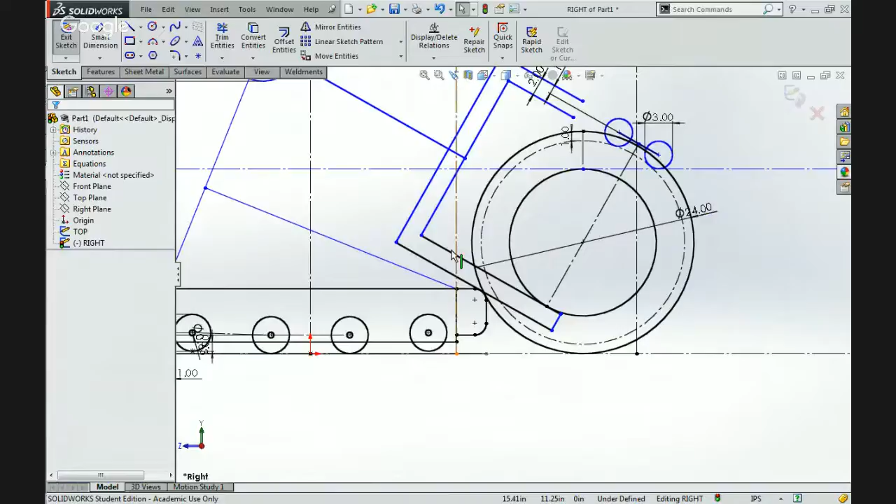So something's got to give here, so that our slope of our arm is a little bit lower. Right now it's too steep, because this is truly the issue. If this didn't have to be coincident to the center, if we were to compromise our grip a little bit, we could bring this back, right? We could bring that back. That was a really difficult way of moving it.

You know, there are a lot of changes that we can make. We could make this not coincident. We could make this ball not coincident with the bumper too. But I think that the best thing to compromise is going to be the compression here. This line doesn't have to be coincident.

That's kind of a best case scenario. But in reality, you could back this up a little bit. It doesn't have to be. As long as you get a really good grip on the ball, this is still a fairly good grip. You're getting the majority of the ball under your own control.

So let's set that back coincident or tangent with the boundary. So now our first roller is set in place, and now we just need to decide where the second roller is going to be. The second roller might not be too effective until it is a certain distance away from the first, maybe 6 inches away.

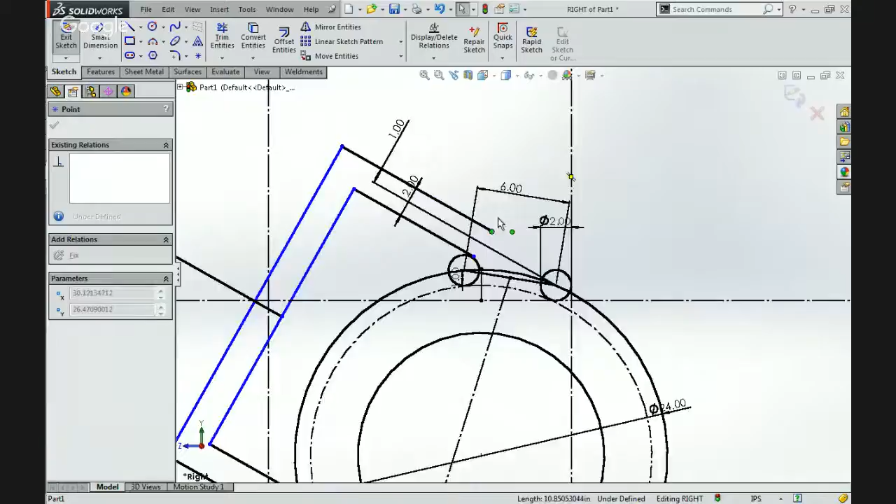Now, this beam here, that imaginary beam that's holding on to this front roller, it's no longer looking too happy. How is it going to hold on to this roller and this roller at the same time when it's at this wonky angle? So let's try to get this to match this angle. This angle is set. This is a perfect thing.

As you can see here, we're now compressing our ball as it rolls in only 2 inches. I think that's acceptable. We just solved the compression issue that we've been having. So now when we roll the ball in, it's only being compressed 2 inches. So the next logical thing is to try to get these two rollers that are doing the compression mounted to something rigid, like this beam that we have here already.

It's not critical that this beam is perpendicular to this back plate. So let's get rid of that perpendicular. And now you can see here we can change the angle. Doesn't have to be perpendicular anymore. So now that it's not perpendicular, we can set that angle to be parallel with the slope between the two rollers.

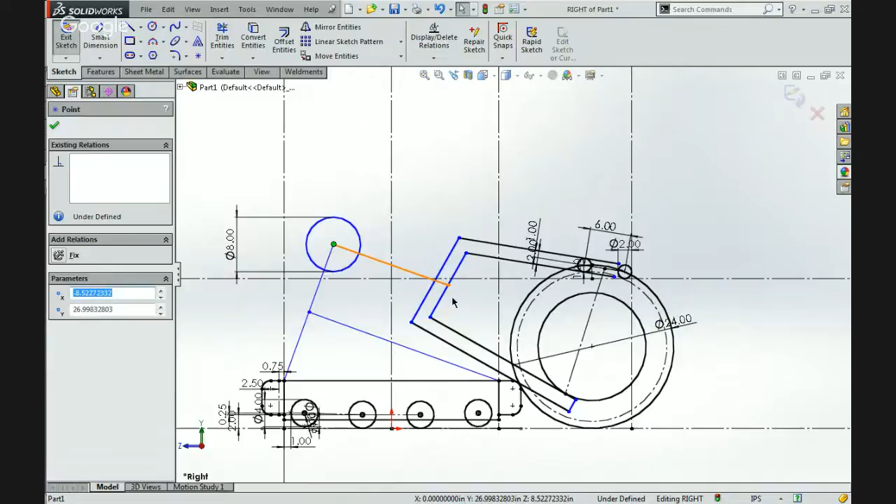Let's set that away, because the next thing that we should be worried about, well, first off, we just reached a checkpoint. We have successful geometry of where our intake rollers are going to be and where this bar is going to be too. I think that's really critical. That's really important.

Just for the sake of seeing exactly where we're at, I'm going to draw a couple more of these lines, one to the center of each roller. So the compression that's going through this roller, the force is going directly down here. The compression going through this roller is going directly down here, and the average is going right around there.

If we really wanted to roll this ball, like I think Hot does, this roller should be over the center. I wonder if there's another variable that we could tweak to get that to happen. That might just be compression. In any case, I think this is going to work for us. So we'll just leave that the case currently.

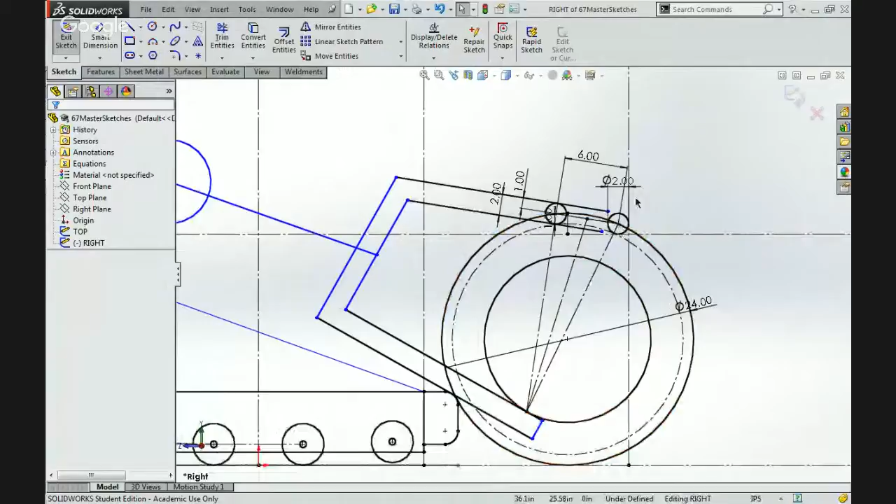So their puncher is looking like this. The puncher is going to sit on top of this structural bar, the structural member that they've got going. So that means, and that looks like they've got 1-inch tube for their puncher, so that's also helpful.

I would say that let's create a 1-inch profile of their puncher, of their square puncher. So in this case, it looks like that. That's their square puncher.

We could make this square tangent to the ball, but as you think about it a little bit more in three-dimensional space, even though it looks like it's touching the silhouette, it's not actually touching because the ball is spherical. It's very evenly spaced, not touching this puncher. So it's actually only going to start touching when it's somewhere around here, right? That's when it's going to be touching evenly across all edges.

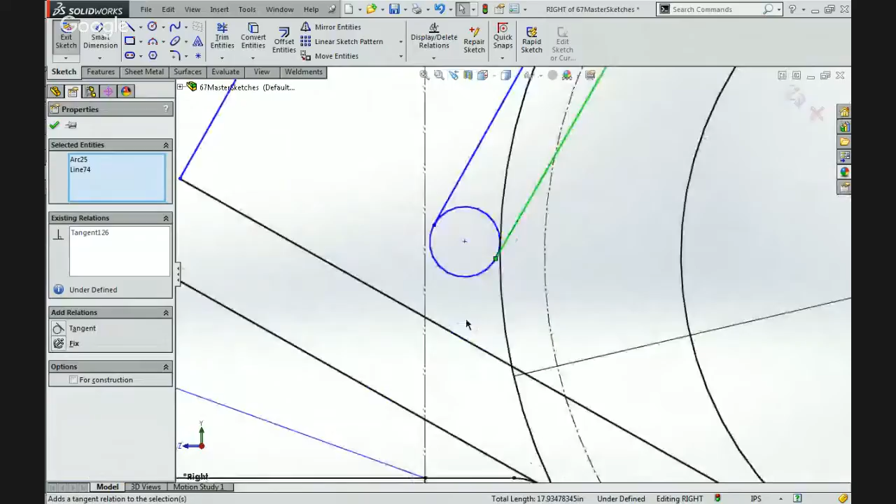Now we get to define, looks like I need to work on adding some more relations. So this and that want to be tangent with each other. This and that want to be tangent with each other. Let's make sure I added those down here too. I added one. This is the other one that I need. Okay, that's better. This is what I thought I had. So now the next thing, gosh. All right, hold on one second.

Let's make those two things equal, and let's make these 1 inch. Oh, make these parallel too. This clearly wasn't tangent. Add that. Great. Now we can add this distance. That distance, let's say that's just 1 inch. I used 1 inch tube, 1 inch diameter tube.

What I was trying to get to before was now we get to decide the size of the square. This length that we're looking at currently is going to be matched depth-wise, so it's going to be a square. The puncher is going to be centered on it. Before we set that width, well, I guess we could set it. No, it doesn't hurt. Let's say that that width is going to be 8 inches. That looks about good. That's a good size.

A really important aspect: if this is the shortest distance between the pivot point and the center of the ball, this arm length here, we want to make sure that the stroke of this, technically it doesn't have to, but for simplicity's sake, the stroke of this piston kind of wants to be parallel with the length of the arm, right?

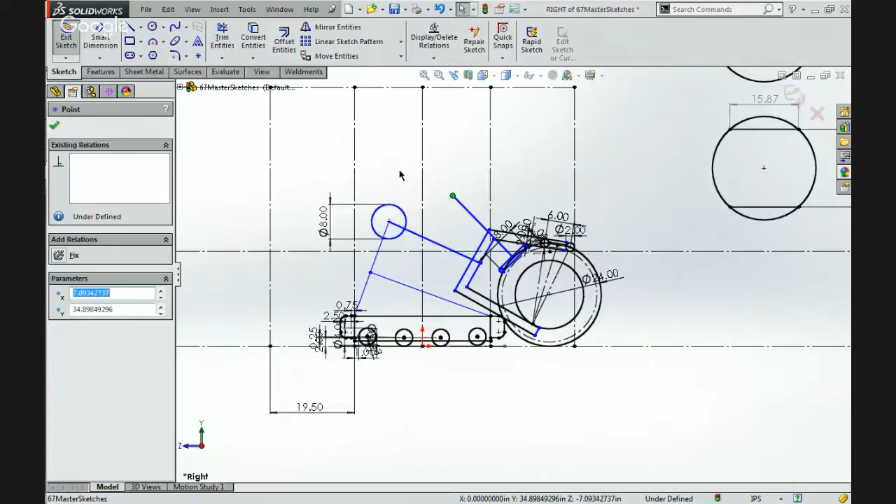The next thing is where is this going to be positioned? We could have it up here, right? That could be okay. That only means when we shoot, we need to lift the arm a little bit. It could be simpler and easier for the operator to judge the angle of release if this puncher were collinear with the arm length, right? If it were at this location here, that would make the operator's job easier.

At the end of the day, we're trying to make a tool for the operator to get the tasks on the field done. It's all about the operator. The robot's just a tool. This will make the job easier for the operator. So there's that. That's going to be a position. This is the cocked back position of the puncher.

That way, the ball, when it's sucked in, is going to skim across. It's going to be touching the puncher at all times, which is really good. That means the ball is going to accelerate with the puncher as it's released, which means that you're not actually punching it. You're more kind of pushing it. You're starting it from zero, and you're not hitting it in the face. You're kind of pushing it across, which is important too.

That means it minimizes shock in the ball, which means that it's not going to go off and travel in unprecedented directions. It'll be very predictable when you're pushing it, not punching it. So there's that. That's really nice. That's a really good position for where the puncher is going to start.

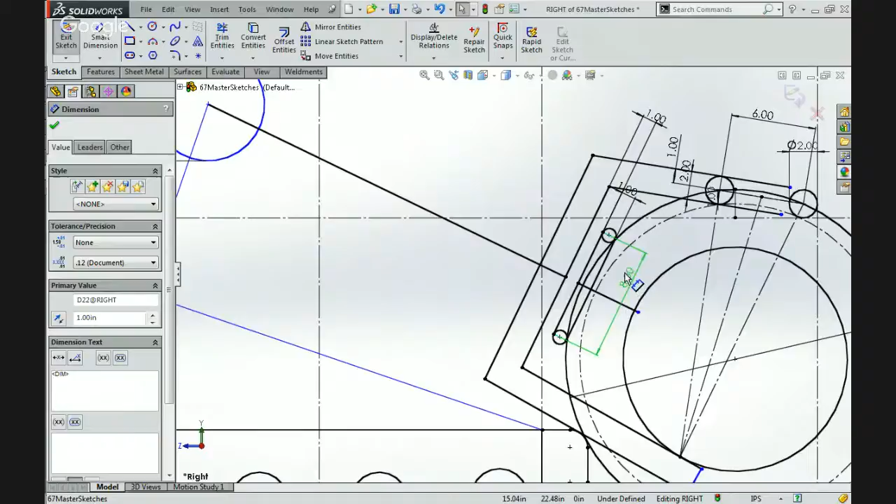Set the distance between the back of this puncher and the structural edge of the material of the actual arm, the rigid body structure. So let's just make that 1/2 inch. Give us a little bit of clearance. Actually, let's make that 1 inch because we're going to need to put a limit switch back there, right? That way we know when the thing is fully drawn back. So that'll be really important, having a limit switch. That 1 inch will give us enough space, I'm sure, for a limit switch.

But look at this. Look at how nicely our geometry is becoming defined. You can see here that our pivot point is set to be on a slope. And that slope is set because we wanted this arm to match the slope of the puncher. And the puncher has a set slope, and everything is, or is it? You know what? Hold on a second. That doesn't seem quite right. There's something that I'm missing.

There's that. There's this. That's collinear with that. Midpoint with that. That's fine. Since we broke that perpendicular relation, I would have thought that this would still be able to, that's what it was. I think, oh, I didn't. Wow, okay, just joking. I thought I made that parallel with this, but no, that's at an angle.

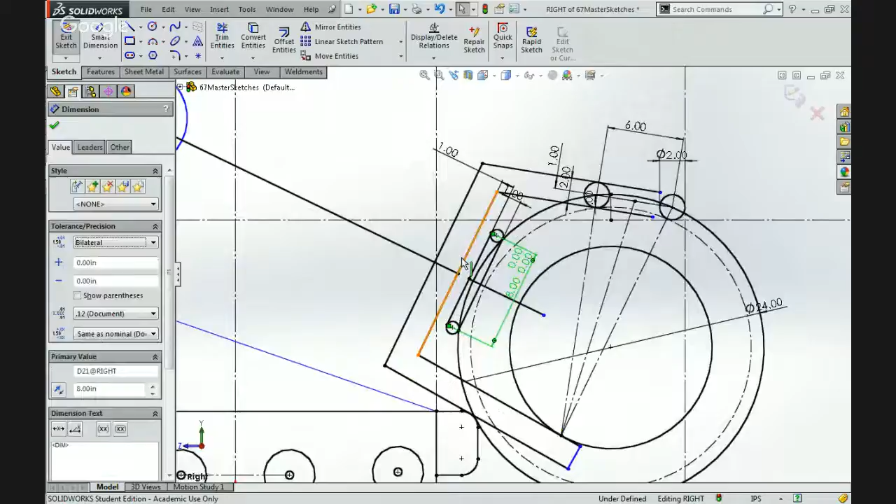So that means that there is a relation somewhere in here. What should happen is this shouldn't be fully defined still. I should still be able to change the slope of this line somehow. So what is it that is defining it? That's parallel, that's fine. What happens if I delete this? This is what I was expecting to happen. So I just got rid of that line. There's some constraint on that line that I didn't understand.

So now when I go and I re-add that line like this, oh, I know what constraint that was on the line. If I go back and pretend like it was on there again, I bet you it's this midpoint. That's it. I put a midpoint relation on the tip of this line and on that back wall, that back brace. That was what was going wrong with it. So now we can still move this pivot point freely in space. I think that'll be of value later on.

Great. The next thing that I think we should define is let's draw a second position. This is the puncher when it's cocked back. Now we should define the puncher when it is fully released, in essence, its finished stroke. So we're going to draw a second case. I don't like looking at these. I'm going to get rid of them. They were helpful at the time, but they're not actually used for defining the geometry.

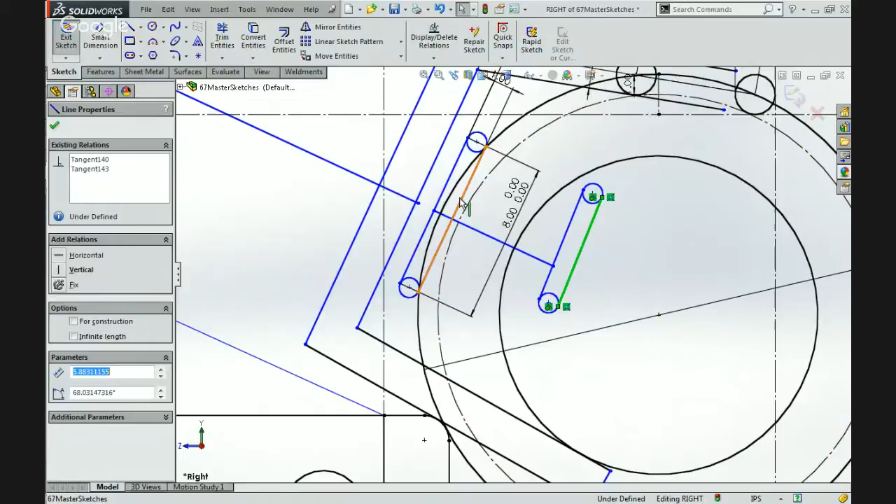I am making these coincident with the circles because we are reconstructing a second one of these puncher pieces. I could have copied and pasted the geometry. I realize that now. Haven't done this in a while. So lessons learned, but I'm almost done adding all these, making these things tangent with each other. Next is making these equal to the previous one and make this line length equal as well. We want to make sure that this and that are parallel.

This line here that I've drawn, you might not have this in yours, but I drew this line to symbolize the stroke length. It starts here on the back panel, and it ends on the back panel of this one. So when it starts, it's back here, and when it finishes, it might be somewhere out here. This line length represents the difference in movement.

So let's say the entire stroke of this thing, we were going to move the ball 10 inches. I don't know how much is needed. This would probably be a number that we would get from prototyping, as well as the compression number. I'm just pulling those out of my head. But let's say that it takes 10 inches to fire the ball repeatedly.

Now you can see that this is rigidly attached to the rest of the arm. When you move the pivot point around, you're really changing the entire geometry of the arm. Now, let's see here. I have to think about this. I think an important thing is when we're firing this ball, what's going to be critical is that it is being rolled across on a floor.

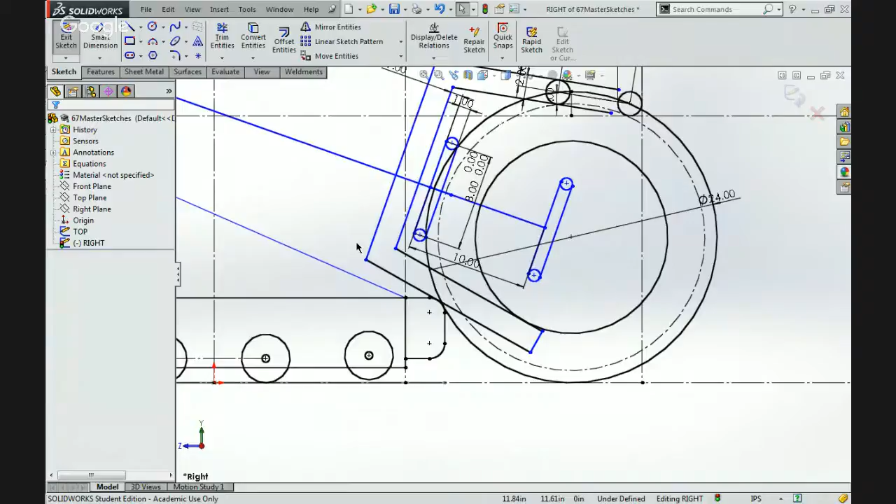Seems simple. However, we have to remember that there are two positions. This has two positions. It's going to be in the down shooter position, or it's going to be up in the compressive position. This currently is representing the compressive position. There's going to be a separate position that represents the shooter. So let us define this more. It's going to be a little bit tricky to define it in the current geometry, so bear with me while I modify this geometry to make it easier to visualize and easier to engineer.

So I'm going to add a line that goes here. Come on, buddy. I'm going to temporarily fix this so I can move that line further out. Oh, no? Fixing it over-defined it because that line was semi-defined. If I fix this, it should be fine, though. Where's fix? There we go. Now, we can make that and that coincident.

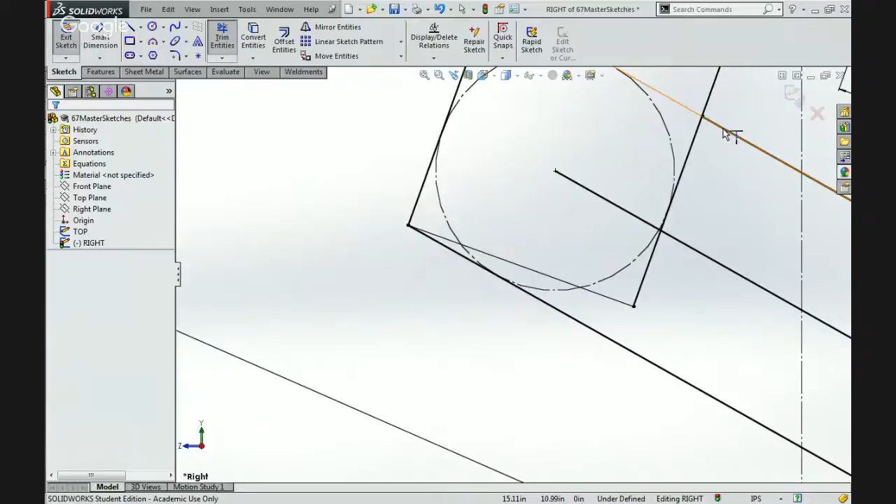So what I'm doing is I'm making a solid beam, pretending like this back plate is one beam, and this is a completely separate entity, which in true fact it is. The one that pivots on this beam, it's going to be centered on that beam like that. And I'm going to make that construction geometry. Oops, not that. This construction geometry. We'll extend that entity up there, so that way it touches there. And then we're going to trim this entity there.

And then, actually, you know what? Let's just make this nice. There. This will be good for demonstration purposes. Perfect. So what I've done is I have reconstructed this joint that was back here, right? Actually, there's probably still some arbitrariness happening here. Let me take care of that.

If I take this and make those two things concentric to each other, make that and that tangent to each other. Didn't have it in the right position. Couldn't make it tangent in that way. I was trying to do something impossible. Oh, come on, you know you can do it. Maybe it's just having a hard time working with that concentric. But if I make that tangent, start with a fresh one. Might have added a geometry that I didn't want. Ah, yes.

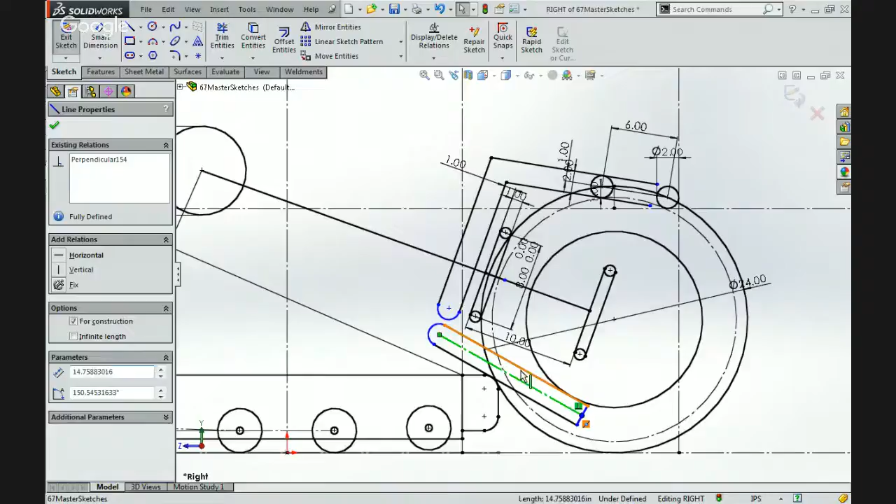But you can see here now, this is what I was trying to get at, there are 2 sections of our robot. There's this bottom one, and this is going to be able to rotate up and down. And then there's this top one. This is stationary. And we can make these 2 things, theoretically, together. Aha, that's why it was being so annoying. These things need to be together. And now, I bet you we can make these concentric. There it is. That's what I was trying to do.

So, just going back a step. So we've got 2 parts. We've got this one down here. This is going to be a compression bar. And then we've got this one up here, and this is going to be the intake bar and the back panel and the back bar. And these are going to be 2 completely separate parts, but they are going to be joined at the hip right there. That's going to be a pivot point for this bar to angle up and down. It's going to have 2 positions. And so firstly we're going to save, because saving is always a really good plan, especially after you do a really complicated thing.

We're going to define a second one of these bars. So I'm going to take one, copy it, and then paste it somewhere else. And very good. Hopefully it kept the relations, and I think it did. But we have to make these two things equal to each other. Since it's the same piece of hardware, just in two different states, they aren't going to change dimensions. So what we really do need to do is make sure that they're going to be the same no matter what.

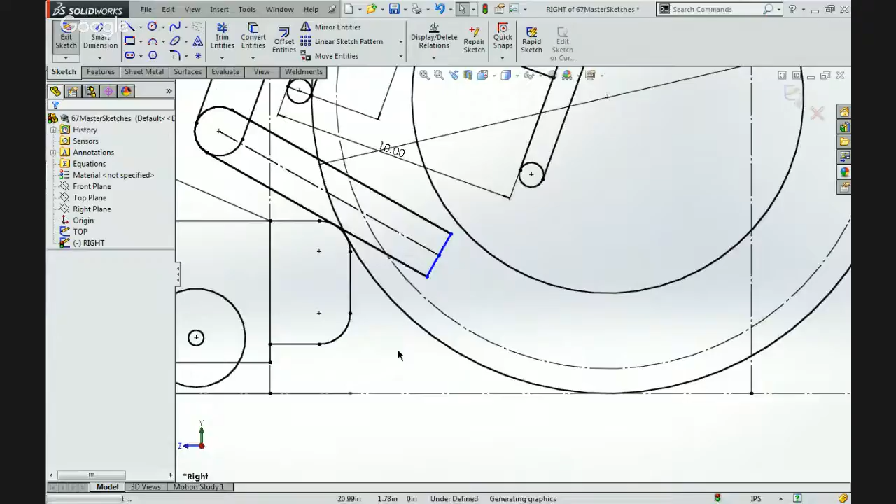Looks like I had them parallel with something or perpendicular with something else. It was not my intention. I should be able to take this one and rotate it differently. Yeah, see, that's the important part. All right, there we go.

And let's, for instance, right now, set an arbitrary length to one of these as being 18 inches. Now this is going to be concentric with that, like that. And this has two states, right? This is the intake state, and then when this is parallel with the stroke, that is going to be the firing state.

However, we have to make sure when we do that, the ball is going to move, I realize. So the ball is going to have two different things. So let's think about this. Okay, yep. There's a problem with this generation, because currently when you're in the firing state, it lifts the ball up, which means this is no longer centered, because this ball is actually shifted up and this shooter hasn't shifted. And it also means that the ball is being compressed against this bar more, which is not good,

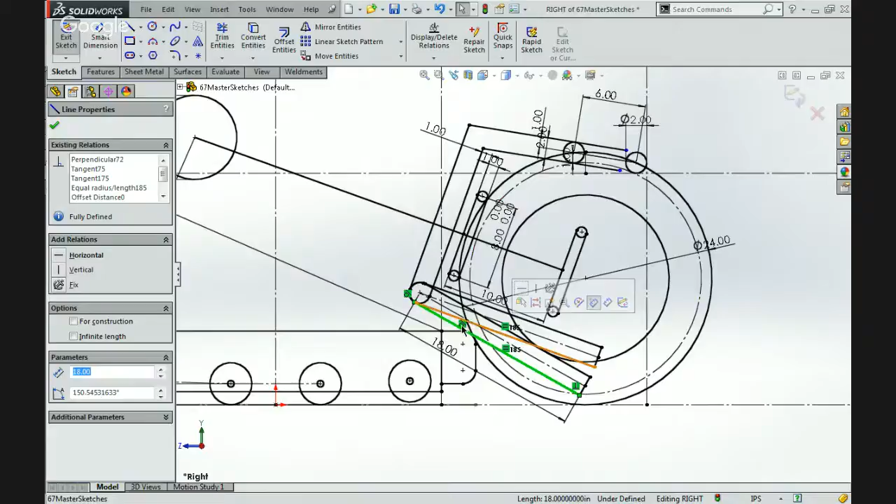So, the way we're going to achieve that is, well, we may have to compromise on a few things. So theoretically, this could have worked down here. This achieves what we want. The intake state is up here, where it's tangent here, and it picks up the ball, and it gets stored back here, and then it's perfect.

And then when we're ready to fire, the top blue one drops to the bottom blue one, and then it's parallel with the stroke width, and then it can fire it out. However, that doesn't work too well with our geometry because it is interfering with the bumper. So what can we do to make that better?

Well, we know that it really has to be tangent to our bumper. That's as low as it really can go. Whoops. Gotta make sure that's the right kind of tangent. It's gotta be above. There we go. So there's that. Let's take a look at their design again, because I'm getting a little bit stuck here, how they achieved this. Okay, here's an idea.

What happens when we change this number? What if we change this to 9 or something small? We get invalid geometry. So what I'm going to do is set this to driven, which means that I can change that number with other things. And I want to see what happens when I drag this down lower. Oh, somehow we lost the tangent relation, so I want to put that back in. There we go. I want to see what happens when that does this. There we go. That's what I was really interested in seeing.

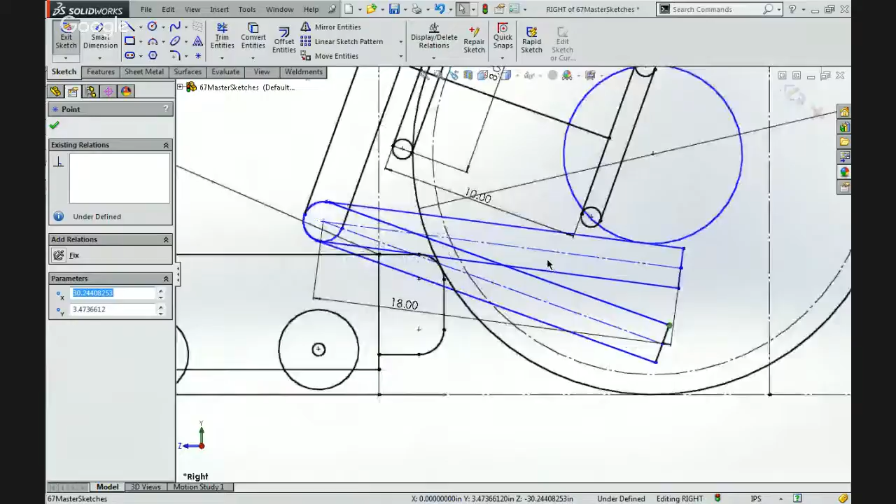So what it looks like is if we wanted to keep this tangent in the lower position, then in the firing position, it's okay if this runs into the bumper, because it's actually never going to be in this position when we're intaking. The arm is going to move up, then move into the firing position, which makes sense, right?

So what to do here. So we want to make this parallel with that. Now, theoretically, that should have aligned everything. Interesting. So it looks like we still have some freedom here. We have some freedom to make this ball

Wouldn't it be cool if we improved upon the design? Oh, no, that doesn't work. I was going to say, wouldn't it be cool if we improved upon the design and we made both of the positions the same position so it didn't have to actuate? That way the intake position was the firing position. And that would be cool, except that it still has compression. So we need to relieve the compression somehow.

So here's the intake, and there's the compression. And the compression is a really good point because we need to make sure of the difference between the two. So here's the ball. In this case, the compression: the distance between these two should be the same distance between those two to minimize compression. So the angle distance that this moves needs to have the effect of relieving 1.5 inches of compression, or whatever we put on compression, and then some.

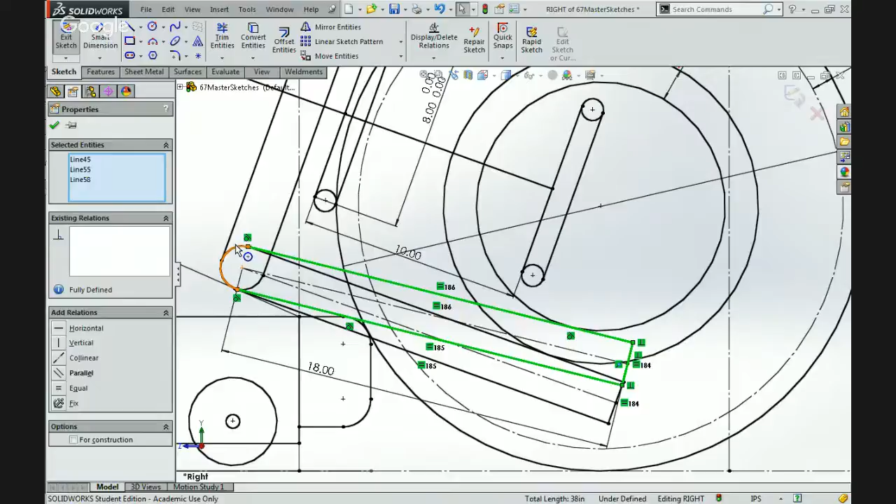So there's going to be 2 states. This is what's really kind of important. There's 2 states here. There's the intake state, which is here. I'm going to highlight this because it's getting difficult to see it. So there's the intake state in green. And then we're going to pretend that we move the arm up in a new position. Then we're going to relieve the pressure by moving it down here to the firing position, which relieves the pressure.

And when the pressure is relieved, and then some with a little bit of an extra 1/2 inch or so, 1.5 inches, it will be parallel with the length of the stroke. Because we set, you can see, a parallel relation between the stroke and the bottom here. So that way they'll always be parallel. And even still, in the pickup position, it's tangent with the bar here, with the bumper. So we ended up fixing everything that we wanted just by tweaking some variables. We got all the functionality that we wanted from this thing.

While we were defining this, because we had to define so many small variables to make everything work, wouldn't you notice... just joking. That was a lie. I was going to say I was getting a little bit confused of why that was. I had fixed this before.

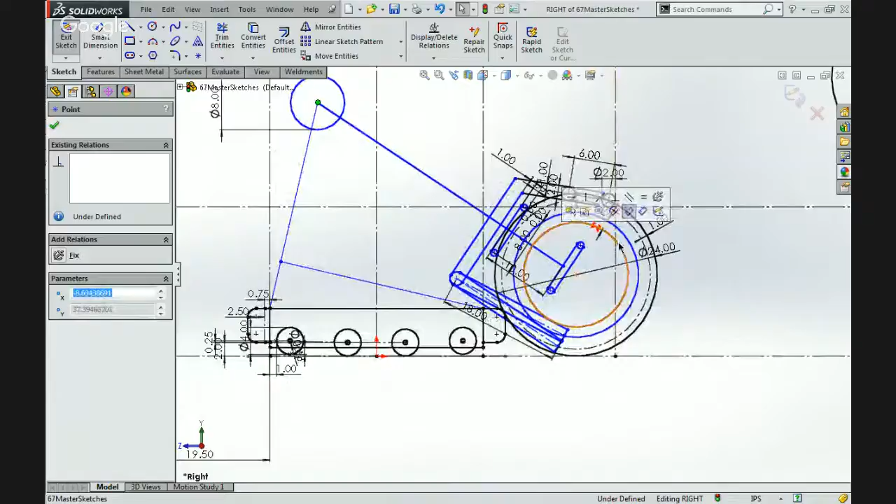So you can see here that we still get to choose where our pivot point gets to be. The shooter is functional no matter where it goes. It will intake and it will shoot just fine because of the smart constraints that we've added. You can see even when it's way up there, it'll pick the ball up here and it'll drop the ball off there, and it'll work perfectly. So now you can see here that as we move it, we're changing the left and right positions of our bars here. As we move one of the bars in, it changes the position of our shooter.

So let's set this back at 18 inches. We had undone that so we could see a few things. So when we set that at 18 inches, it defines one dimension of our robot. So our pivot point is going to be somewhere along this line, and it'll be good. So where is the other thing? Hold on a second. Just look at that. We got a checkpoint down here. The only thing that's still blue are the ends of these lines, and you know, we'll just pretend like that doesn't exist.

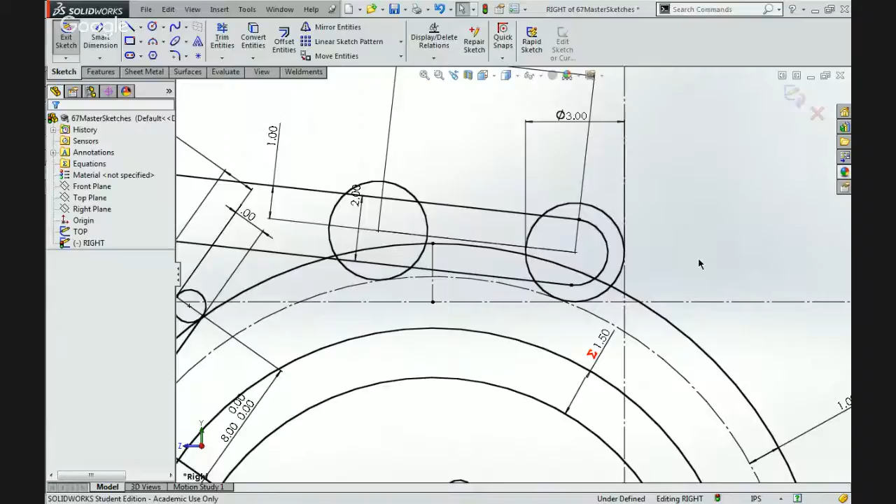Actually, you know what? Let's make this a 3-inch diameter roller, and you'll notice that everything updates and it'll still work well. And now, since that's a 3-inch diameter roller, the actual aluminum structure doesn't get in the way. It'll always contact the roller first, rather than contacting the structure first. And we'll just make this really nice and pretty by rounding off this end. We'll make that concentric with the roller so it's super nice. And then make that end cap tangent. Perfect.

So look at that. Look at that complexity. But when you look at it and you're building it, you don't see all this extra crazy construction geometry. It'll just look super elegant. It'll look like, of course, it was designed that way. Why would it be designed any other way? You know? But it takes a lot of thought and a lot of effort to get it to work. Very good. So here's that. There's that. That's all very nice.

Now, how tall is this pivot point here? That's what I'm curious about. If it's up here, I want to get some numbers on the range of where this pivot point can be. I'm just going to define it here, and I'm going to define it here. Very good, and I'm going to set this to being driven.

So it can be, you know, 8 inches from the side and 38 inches from the bottom, or it can be 31 inches and 18 inches. You know, we could center this on the middle of our robot if we wanted to. We could pop it right down there in the middle, and that way it would be almost symmetrical. You know, we could.

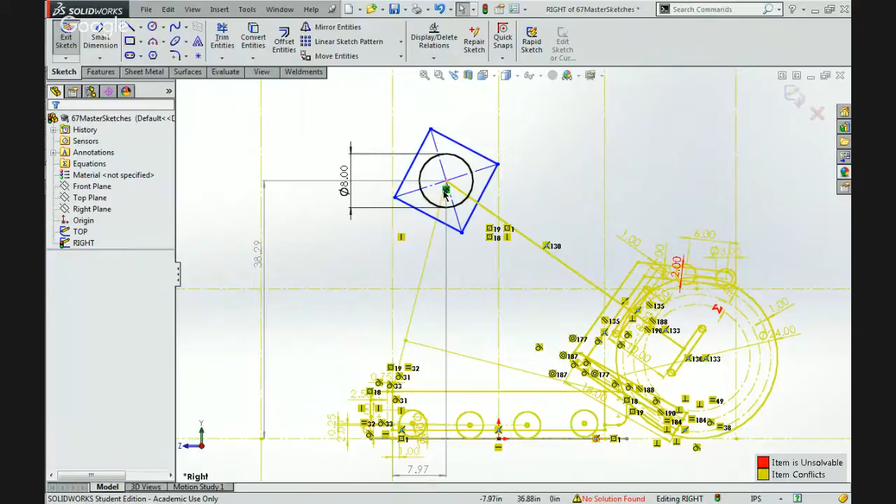Excuse my computer. You needed to have a box of mechanics that was maybe 18 inches long, and it was parallel with this thing. And so it took lots of extra space in order to actually rotate your arm around. But to rotate your arm, to get it to the other side, it's kind of dangerous, right? You don't want to protrude out of your frame perimeter.

Although, now that I'm thinking about it, what I was trying to get across was that if you center your pivot point here, all the mechanics that are centered on your pivot point are just kind of centrally located there. But a really good point, actually, a different point that I wasn't really making before, is center of gravity. The lower you get the weight of your mechanics to the ground, the lower your center of gravity is, or the center of mass. Where is all the weight of your robot?

So if we decided to mount our pivot point way up here, which we totally could, that's completely legit. We could do that, but if a lot of mechanics had to be up there, that could be very dangerous for making our robot top heavy. We could also mount it lower to the ground down here, which would be beneficial for center of gravity. However, when we lift up our arm and we try to fire, it might not work as well

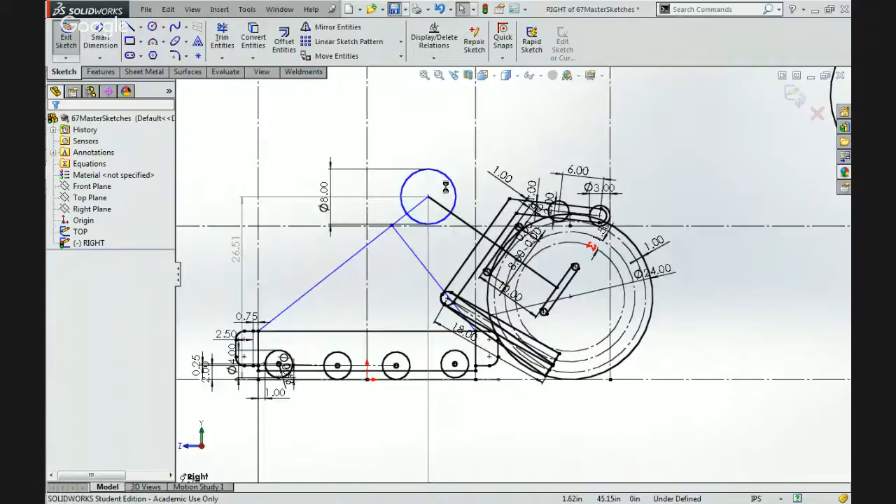But this geometry here that we've defined is partially true. It's partially true, but they've actually been very smart, and they didn't cantilever their entire robot arm outside the robot. This entire length here is pushed back into the robot. So now, let's go ahead and save our work here so we don't lose it. Now we've got the challenge of fitting this inside the robot.

So what is constraining this into place? How can we move this entire 18-inch long piece back? We'd have to move this point back. What's holding this point back? It's going to be the puncher. How can we move the puncher back? Because it's more of this wall here, right? It's this wall that's really keeping us in.

I bet if we take this 1 inch off, you can see here we're getting really close. All right, that's kind of what we want in the end. We want this to be self-contained inside the robot frame perimeter, just like that. But how do we bring the robot puncher and everything back with it?

And I think the question more is, where is the ball when the puncher is contacting it? And where is the ball when it's being initially picked up by the intake arms? I think those are two different positions. So I believe if we take the concentric or tangents off of that, we can move this entire puncher system back.

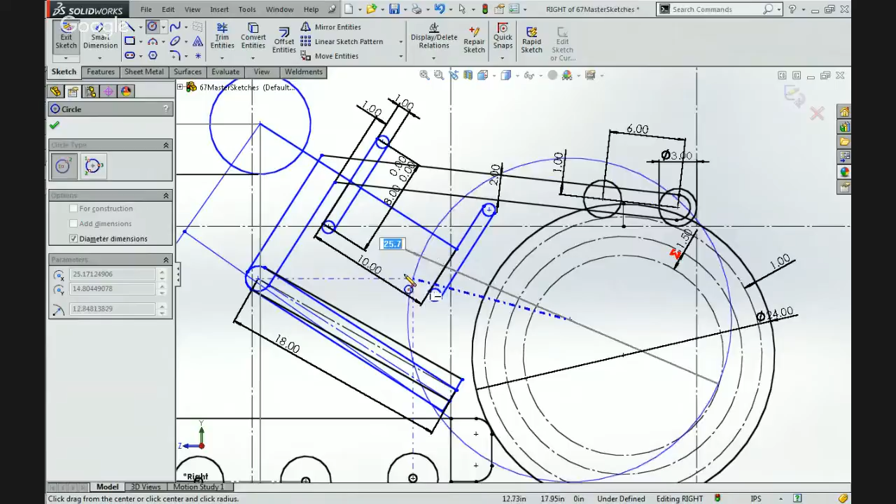Whoops, I exited the sketch. That's fine. We're going to re-add this 1 inch dimension I deleted just for demonstration purposes. And we're going to add another ball. This ball is the same diameter as the other ball. And it's going to be tangent.

Whoa, that was unexpected. No solution found. It's complaining about this 2 inch thing. I'm going to rebuild because nothing should be going wrong. But clearly it's not happy. So let me get rid of that equals relation that I just added. Maybe it's freaking out. Oh wow, look at that. That was exciting. Okay. You know, another thing that could help is, right. Okay.

So looking at this, those two rollers are very, very far apart from each other. And in fact, it looks like this roller is directly across the tip of this end. So what we really could do is delete the 6 inch arbitrary number, and it's no longer going to be tangent to this ball here.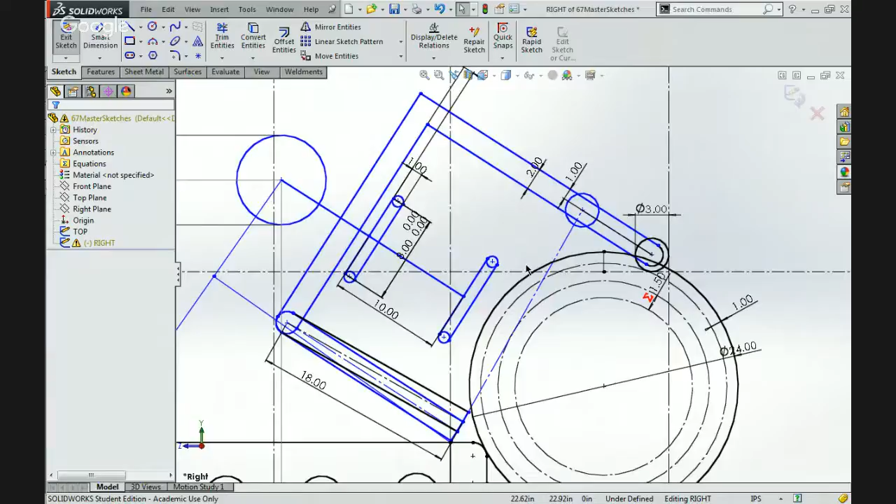So look at that. Now, as the ball rolls from, I'm going to make this parallel with the shooter. That way, as it leaves, it's exiting just, you know, a hollow tube, and it's not tapered at all. But now, as the ball enters, it's being compressed between the floor and the intake roller. Then it's squeezed between the intake roller and the bumper.

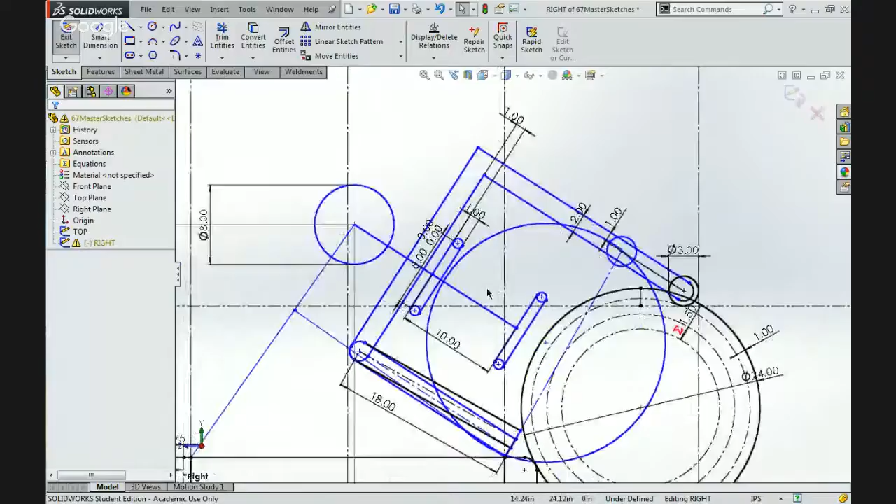You can see how much it's compressing. It's compressing almost 3 inches before it gets stored completely inside the robot. And it's quite obvious that there's way too much compression inside the robot cavity currently. So let's see if we can fix one thing at a time. We're going to use this ball here that I've just drawn for illustration purposes as an actual defining element of this robot. So a really important part is this ball is going to be representing the position of the ball when it gets fully held inside the shooter.

So it's going to be tangent to the back wall of the shooter, so it's always touching, and it's going to be tangent to the bottom, or the rail that we've been drawing this entire time. However, it's no longer critical that the rail is tangent to the bumper, right? Because it's not going to be resting on it. So all that really matters is that the interior riding rail edge of the ball is tangent. There we go, just like that.

It moved on us, that's fine. What happened here? So it did move on us, but I guess it's not too fine. Because it looks like the new ball kind of moved where the original ball was. Let me Control Z that. Ah, there's a tangent. That's not supposed to be there. It was an old tangent. There we go, much better. Now, this entire shooter module is moving as one. But you can see the intake piece that's over here, it stays put because that's where it's defined to live. That's where it's supposed to be. Fantastic.

Now there's another section here. As this entire shooter rotates, it needs to make sure that it's within the frame. Particularly this intake bar down here. Let's say even when it's in its lowest position, like let's say we had a pneumatic firing issue, we want to make sure that that is never going to be interfering with the frame. So I'm just drawing a really large circle, starting at the pivot point, and it ends at the farthest position of this flap. It should never be in this position when it fires, so I might as well use the upper position, but just in case, I want to use the lower one.

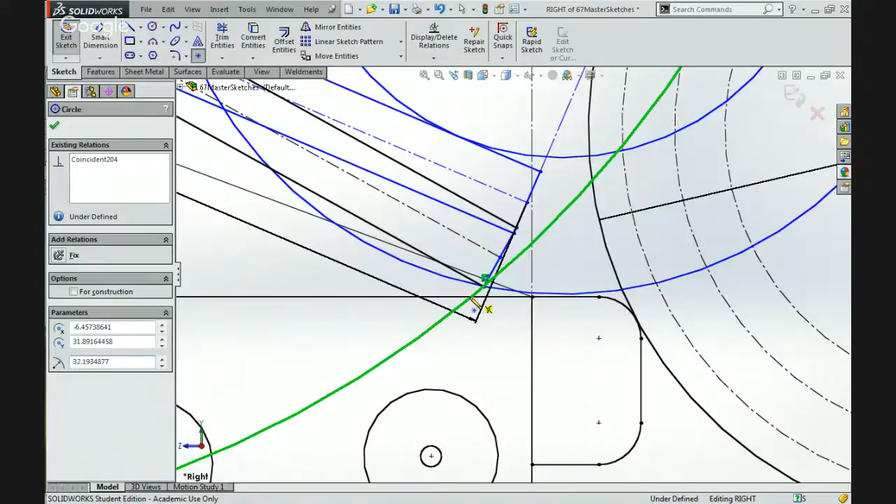And then we just want to make sure that, well, I'm going to fix this point here so that'll make it easier to demonstrate. This circle represents every single point as this arm rotates. So as this piece of the arm rotates, it's going to be traveling along this arc. We want to make sure that arc never hits this corner of the frame, or else it's not going to actually nest inside of our frame very well. So we're going to dimension the intersection of the frame and that point. We're just going to set that back maybe 2 inches to give us a little extra room. So now it'll always be 2 inches away from the frame, like that.

And we're not done yet. We have a fixed point here. We got to get rid of that. So that gets us one step closer, right? So now our shooter and puncher is located in space relative to the frame, so it can't move backwards into the robot anymore. The next thing to do is, let's see here. What do we want to do next? Just going to make that construction because that's not the actual ball. This is a really good checkpoint. This kind of gets us really close to where we want to go.

All right, so I think the next thing that we want to be doing is making sure that the compression, as the ball moves across the entire way, is not too crazy of a compression. So, for instance, let me select this chain here and make it construction so it's not as visually dominant.

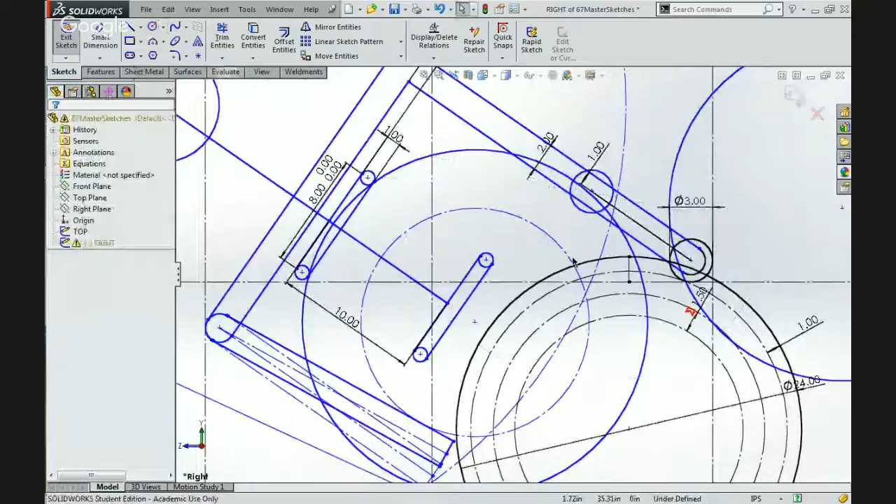That line, we want to make sure that it's over the center point of the ball. That way we're really holding onto it tight and it's not going to slip out. And we can go ahead and just define that length here. Maybe we just want to have 1 inch over. We can also define, that's going to take a second to think. I think it would also be wise to ensure.

All right, well, currently, lots of thoughts going through. There's lots to do in this model currently. First off, I'm just going to list the things that are going through my brain. We need to make sure that the ball can be successfully passed to this secondary roller, right? We need to make sure that this roller can get it touching this secondary roller. That way the ball is always in control of the robot. We also want to make sure that this roller, there's a lot to think about in this model. My brain just kind of stopped working there because there's lots of concerns.

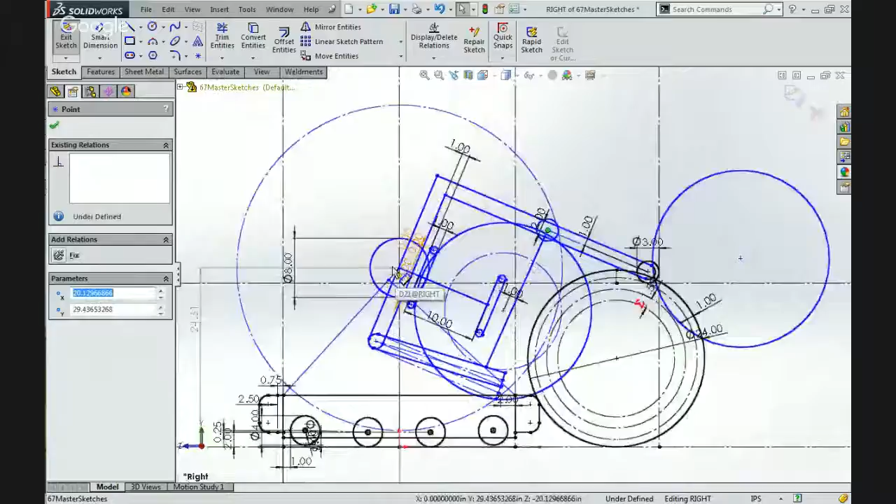But you can see here, this is kind of a position where the ball would be transitioning between the two rollers. And it looks like it could be a fairly successful transition. Looks like the secondary roller might be able to bite into it just enough. But to make that a little bit less nerve-wracking, let's see, that is the pivot point that's moving around. So I'm going to take that pivot point of ours and I'm going to fix it somewhere because there are too many undefined variables going on.

There we go. We also want to make sure, let's take a look at this. Relation that we added was deleted. Oh no, it wasn't. I was looking at the wrong circle. That's the ball. Okay, so that's fine. I'm just looking at the movement here, looking at how it can be defined. What would be the optimal place for it?

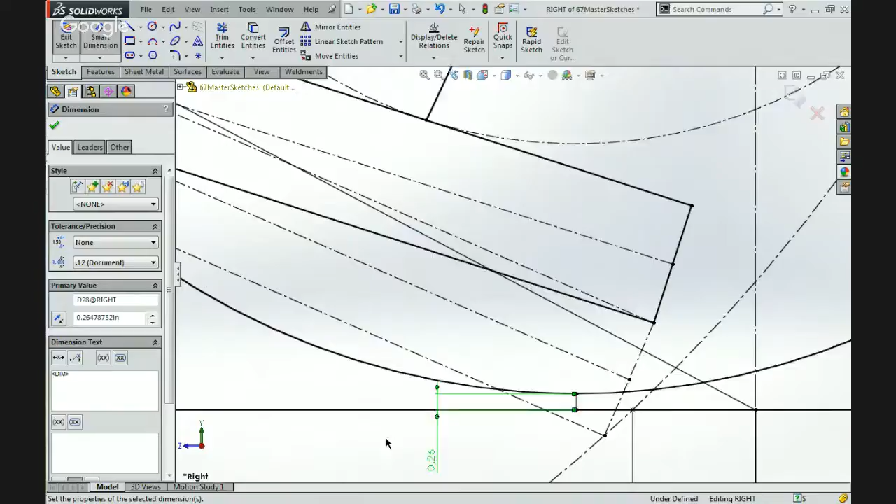And the optimal place, of course, is that when it's down here, if we place the ball down there, we could do that. However, what I notice is that the ball is interfering with the drivetrain and the bumper. So we want to make sure that the ball is always on top of the drivetrain and the bumper. So it's got to be at least up here, maybe a ¼ inch above the drivetrain, I guess not at all times, at the specified time of holding the ball in the shooter. There we go. That's a beautiful thing. That's a nice sight. Okay.

Next thing, intersection there. Is that parallel with anything? That's got a distance. Now, I should have the ability to take this intake roller and move it to the right or left.

And I'm trying to figure out why this is fully defined, and it shouldn't be yet. So if I look at the constraints I've got here, I've got that intersection and it's merged here with that circle. That circle is only equal, and it's got a smart dimension on it. Or it's got this line. If I delete that line, now it can move up and down, but that's not my concern.

I'm trying to get it to move along the edge here. So it means that this line here is defining it. Oh, and of course it's this. That smart dimension. There we go. That's what it was. So we're trying to define now where this line is going to be, this force line.

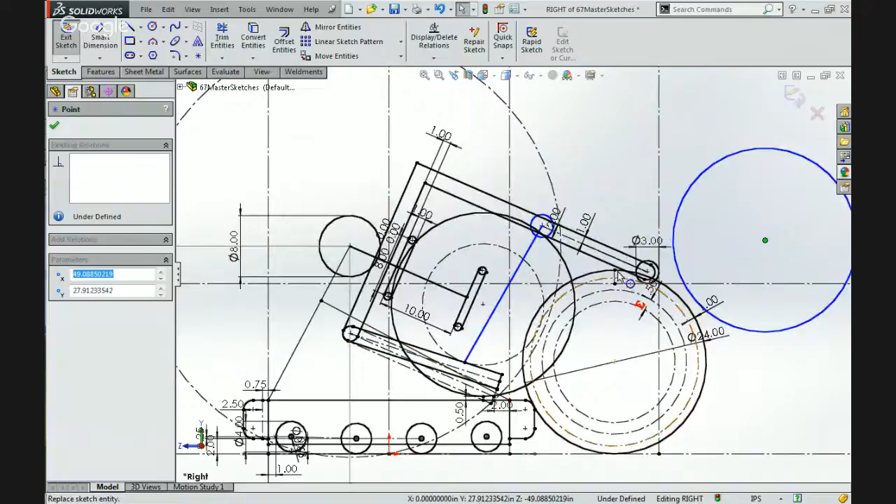And so somewhere along this section over here, I think is promising. So if I draw a compression ring or a compression diameter here, and I specify the compression between this and that, this ball here is symbolizing the moment that it's touching both rollers at the same time. So it's being compressed by both of these rollers at the same time.

So you can see here that I can change where the position of the ball is when it's being compressed by these rollers. So I also want to make sure that this roller here that I'm moving functions as a stop, to make sure that the ball that's already contained inside the robot is going to be compressed well. That one needs to be compressed as well to be held in place. So I'm going to add a compression to this one as well.

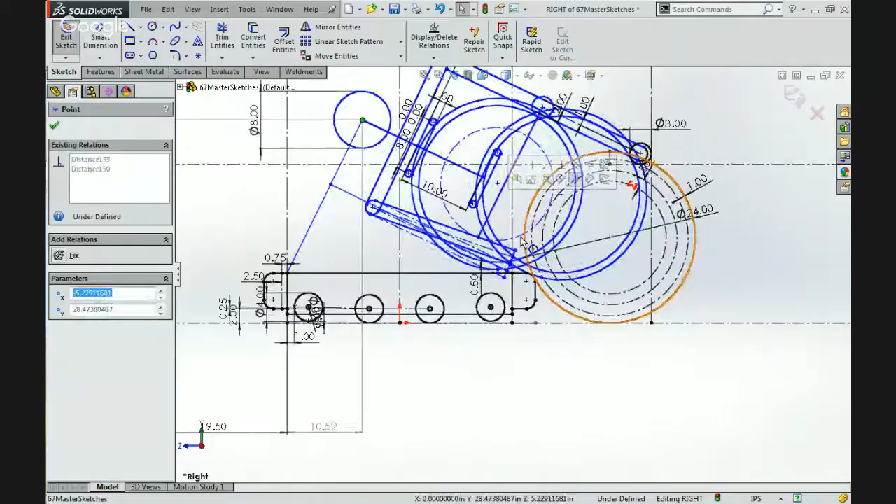That was anticlimactic. Okay, there we go. I want to understand this a little bit more. Yep, so I did have that constraint set up right. I'm just going to re-add it, because I don't know why I didn't apply it the first time. If it were 1.5. Whoa. We lock this in place. Make that 1.5. Should move the shooter.

All it does, actually, though, is it just shortens the length of this arm, which I understand now. So it was doing its job before; I just didn't understand it. Instead of moving the entire shooter, it was just changing the length of this arm, which is still valuable, and we want to make sure that the arm doesn't run into the drivetrain. So we're just going to leave that there, and we can probably just leave that back at 2. You can see there how the arm just got shorter.

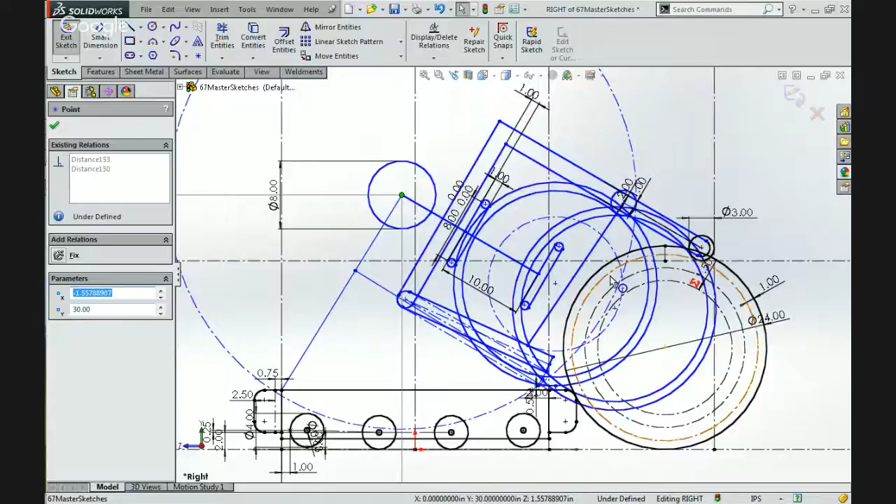So the next important thing looks like it's going to be figuring out an optimal space. Looks like the angle is what's really defining how far forward the shooter gets. So if we set it at an intense angle like this, we can see that it's going to roll right in, and it'll have very nice compression going across the entire way until it gets inside.

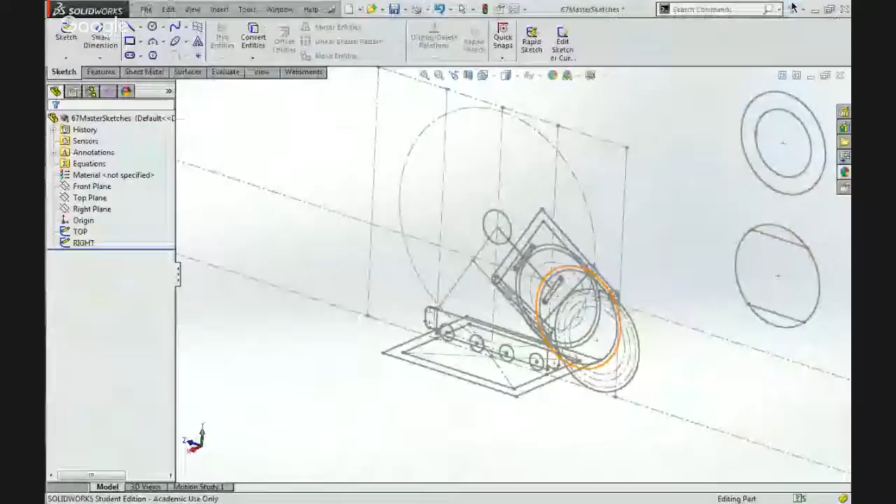Currently, our pivot point is at the bar, so we could go back in and drop the bar an inch underneath the pivot point and make it match what they've got, but the entire intention isn't to match what Hot has done. The entire intention is to make it buildable. We might be able to add a shaft right at the center of that bar, but it could be easier to add an inch-long flange, just for manufacturability. It can get the same job done, but it might be easier to manufacture, easier to assemble, and easier for maintenance as well. So even though the geometry is a little bit more complex, it's much simpler later on. So this is a very powerful sketch.

Now we have dimensions for a lot of these things. Like this length of the arm up here is about 26 inches. The entire width of the thing, height of the shooter, is just under 24. It's giving us a lot of really good numbers that we can take further. As soon as we get this into 3D, we can add the 4-bar flippers. And we can really make this entire robot 3D and reference this one sketch.